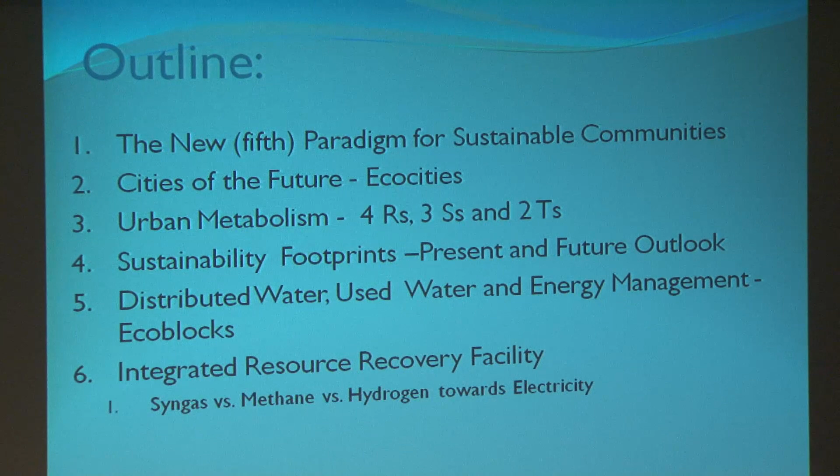So how do we do that? Syngas, methane, hydrogen, towards electricity, nutrients, biomass, fuel, soil, solids, incorporating solar and wind power, sequestering GHGs. And a lot of these things are already happening — not in the United States, unfortunately, although there are some promising developments now. But mostly it's abroad, mostly in China, Singapore, the Middle East, Europe, and so I will talk a little bit about this.

I wrote an article in Czech language, by the way, after 40 years. I call it, translated, Cities of the Future: Utopia or Unavoidable Reality. I obviously am for unavoidable reality, but some people may think it's a utopia.

But there are a few quotations which may help start the discussion. Urbanites now outnumber their rural cousins, and there's surprisingly good news. This is surprisingly good for the environment, because the average person living in New York produces just 30% of the greenhouse emissions of the average US citizen.

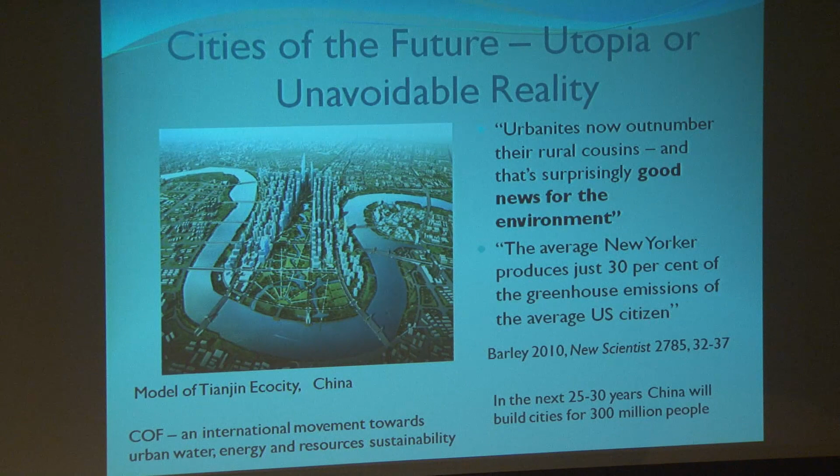What's counteracting this is that in the next 25 to 30 years, China will have to build cities for 300 million people. They will have to build one New York City every year. This is something China is facing, and they're trying very, very hard to face it in the right way, because they know if they don't, there might be a pretty bad catastrophe.

I already introduced the cities of the future, and here is a picture of Tianjin, which is now being built as a consortium of China and Singapore, near Beijing, about 150 kilometers southeast of Beijing.

So we talk about this trinity of sustainability: society, economy/economics, and environment. Sustainability means that all these three are in harmony. There is some kind of hydropolitical discourse in our area, but we're also saying it's not only that they're in harmony today, it has to be in harmony in the future.

Now people are also saying we cannot just make them equal. We have to see that environment and public health are a predominant issue in this sustainability discussion. Sustainability is achieved when outcomes which are socially, economically, and environmentally sustainable are successfully contended in the intergenerational context. So originally, sustainable development was defined as that which meets the needs of the present without compromising future generations.

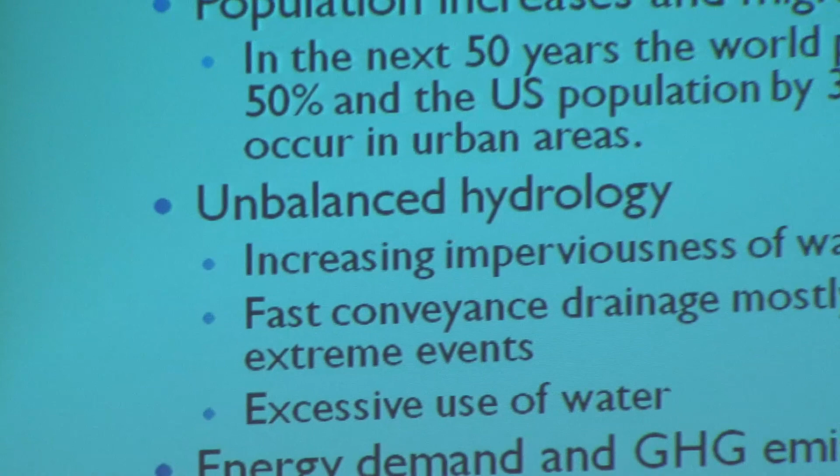We have unbalanced hydrology; the hydrology is not functioning well, because of increased imperviousness and fast conveyance systems, mostly underground, so people don't see water or wastewater. They just see the impact downstream. We have excessive use of water, and obviously high energy demand with excessive GHG, greenhouse gas emissions.

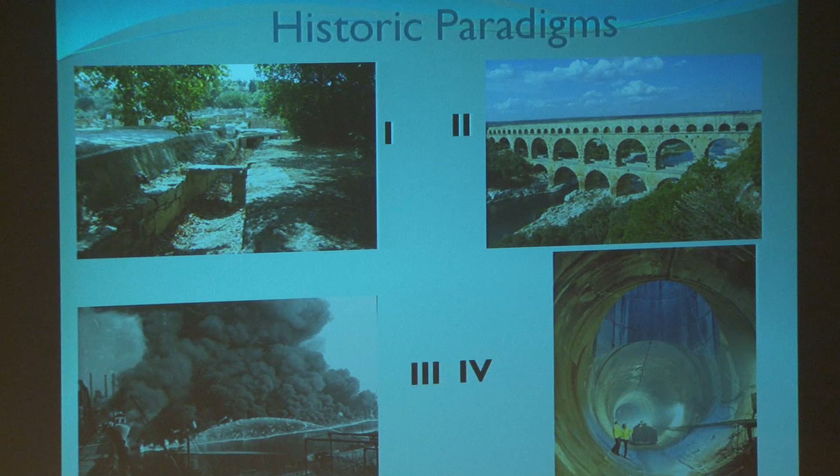So why a fifth paradigm? I put four pictures here for the previous four paradigms. The first picture is from Athens, dating about 2,500 years ago. At that time, water was basically provided by springs and wells, and surface drainage was by gravity. I was so excited when I saw this channel in this old marketplace in Athens, because this is how they did it 2,500 years ago. This is not much different from what you can see now in developing countries.

Paradigm number 2 is long-distance water transport. Some of these aqueducts, all Roman aqueducts, were up to 50 kilometers. But if you go to Istanbul, which used to be Constantinopolis, they had aqueducts coming from 400 kilometers. So they knew how to do that. They were distributing water by pipes, lead pipes and clay pipes. Sewers were invented, Cloaca Maxima in Rome, but that was preceded by buildings and cities on Crete.

Rainwater was harvested in Pompeii. They had rainwater harvesting, which is very common in the Middle East and the Mediterranean, along with some primitive treatment. So that's paradigm number 2.

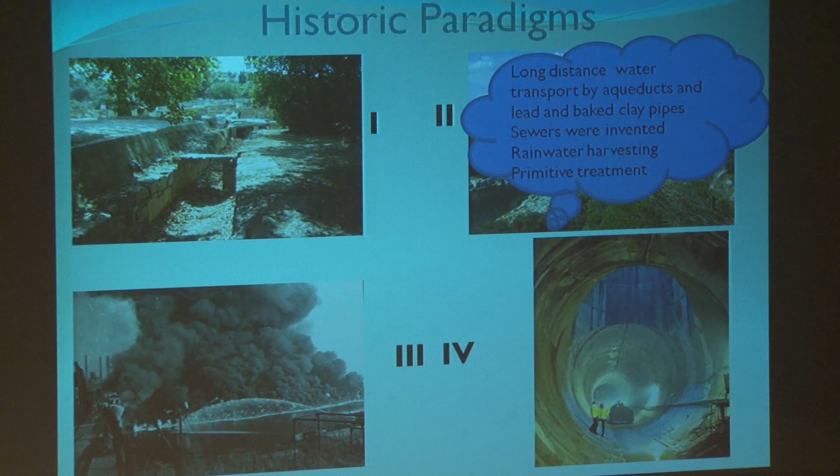Then came the industrial period, which dramatically increased pollution. Rivers caught on fire, as you saw in the picture—the famous Cuyahoga River fire in Cleveland. Actually, there were several fires because of too much oil and too much junk coming into the river. So people decided to cover the streams and put them underground, out of sight, no problem.

This is what actually happened in Boston to Stony Brook. Part of Stony Brook goes under the Northeastern campus. Stony Brook was a very historic river in Boston, but nobody knows it. People only know the Stony Brook train station and Stony Brook Park.

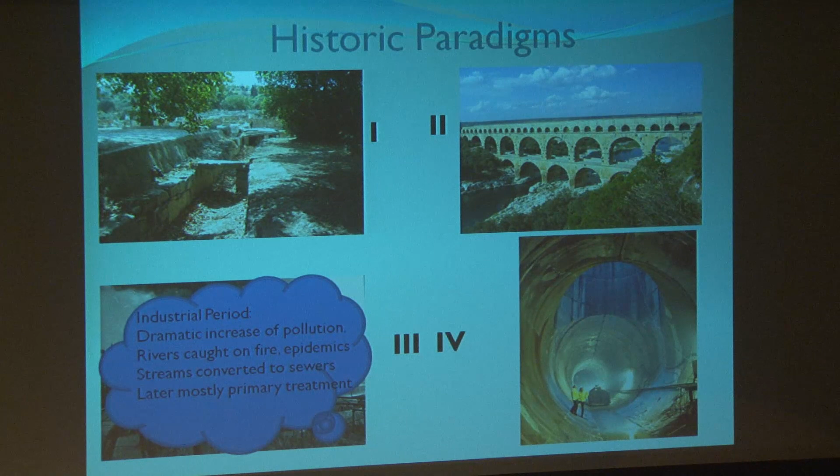But there was a river bigger than Muddy River, which is now underground. It should be daylighted. Now the 4th paradigm was after the Clean Water Act. We are now in this 4th paradigm. Developing countries will still be on the 3rd paradigm, with heavy investment in infrastructure, deep tunnel storage, and combined sewer overflows—basically characterized by using water collected by fast conveyance, end-of-pipe treatment, and dumping.

So we have to go now to changes, because we have problems with the 4th paradigm. The natural hydrologic status of urban water bodies and watersheds has been modified by imperviousness, building sewers, and stream modifications, including burying streams. This impacts the remaining streams, increasing high flows and flooding, with peak flows increased by a factor of 4 to 10. It becomes very difficult to sustain viable populations and biota, with increased variability of flow and increased stream bank erosion.

There are problems in groundwater too, including here in the Back Bay area, where buildings were sinking because groundwater levels dropped as recharge diminished. Here is Mexico City—this cathedral should be horizontal, but as you can see, it's kind of sinking. The same subsidence problem is happening in Venice, Philadelphia, Mexico City, Boston, and many other cities.

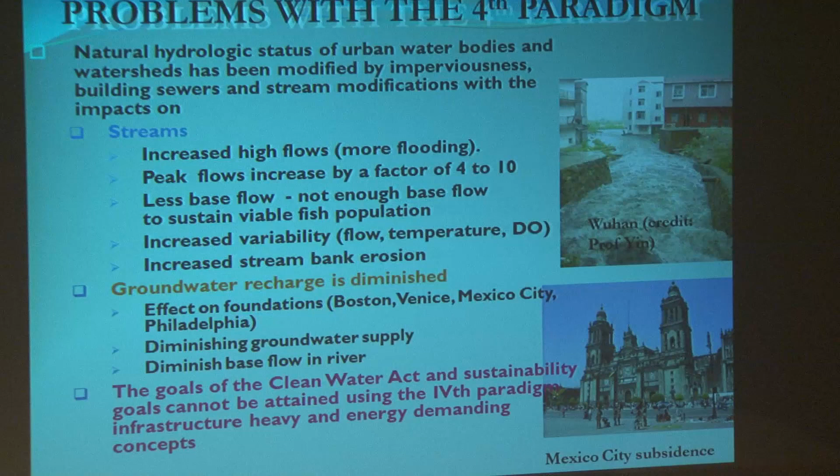We have diminishing groundwater supply. People don't even use groundwater anymore, causing diminishing base flow. So people are realizing that we cannot meet the goals of the Clean Water Act by 4th paradigm infrastructure, by 4th paradigm management of resources and water.

There's also damage to streams from wastewater disposal. When you take water upstream, there isn't enough flow left in the streams—for example in Denver, or the Chattahoochee River in Atlanta. After this water is used and reused in the city, it discharges a huge effluent into the stream, which becomes overwhelmed with effluents. We call these effluent-dominated streams.

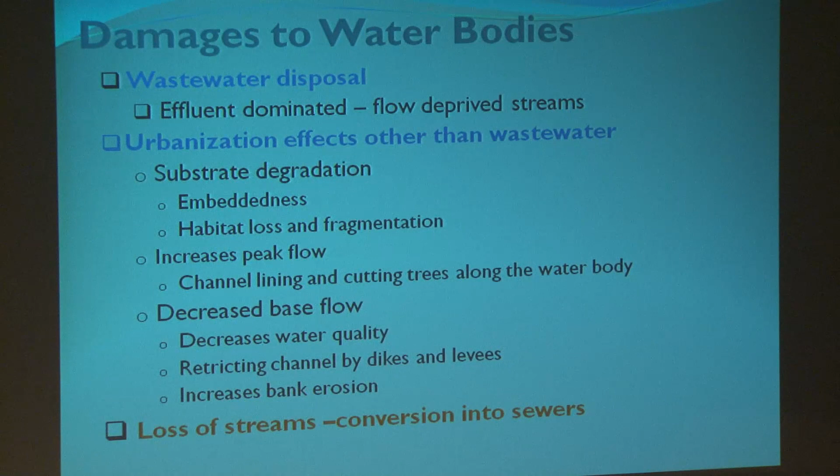Other problems include substrate degradation—the bottom of rivers covered by muck and clay instead of gravel and sand—habitat loss and fragmentation, increased peak flows from channel lining, cutting trees along water bodies, and decreased base flow. This is one of the worst problems of urban streams, and their final destiny is changing into sewers and culverts.

We have new threats to water supplies, problems maybe not as prevalent yet in the United States, but already coming. For example, 16% of lakes in Florida are so-called hypertrophic—beyond eutrophic. Hypertrophic conditions are characterized by too much nutrients and harmful algal blooms, with millions of organisms, sometimes more, in 1 milliliter. That's basically a pea soup, as you can see in these slides.

The lower slides are something I'm working on right now—it's a danger to the water supply of Prague in the Czech Republic. This is not the reservoir from which water is taken to Prague; this is a forebay. The actual reservoir is very large, with 4 small reservoirs already overwhelmed by cyanobacteria algal blooms.

We have problems with new chemicals appearing in the environment: endocrine disruptors, antibiotics, and pharmaceutical nanoparticles. People are talking about many things now coming to our recognition, and we have to do something about that. So this was kind of a bleak picture.

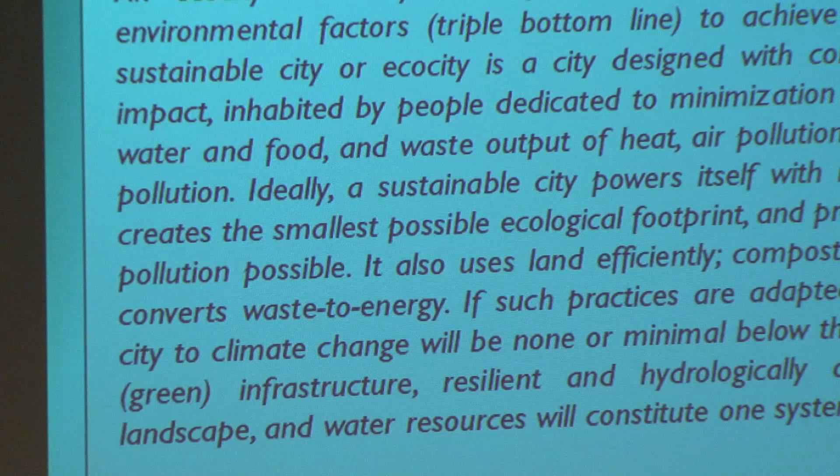In 1985, he wrote something about eco-cities. The book was republished recently. He defined an eco-city—a city that is sustainable, behaves well, everything balanced—as a city or part thereof that balances social, economic, and environmental factors according to this triple bottom line to achieve sustainable development.

A sustainable city or eco-city is designed with consideration of environmental impact, inhabited by people dedicated to minimizing required inputs of energy, water, and food, and minimizing waste outputs of heat, air pollution, carbon dioxide, methane, and water pollution.

Ideally, a sustainable city powers itself with renewable sources of energy, creates the smallest possible ecological footprint—we will be talking about footprints—and produces the lowest quantity of pollution possible. It also uses land efficiently, composts used materials, recycles or converts waste to energy. If such practices are adopted, the overall contribution of the city to climate change will be none, or minimum below the resiliency threshold.

Green infrastructure, a resilient and hydrologically and ecologically functioning landscape, and water resources will constitute one system. We've been thinking about doing something better, so we have to measure the outcome.

We have two very popular measures in the United States which are spreading worldwide. One is LEED, Leadership in Energy and Environmental Design, which measures the sustainability of the site: smart location, green design, energy efficiency, indoor environmental quality, innovation and design, and neighborhood patterns.

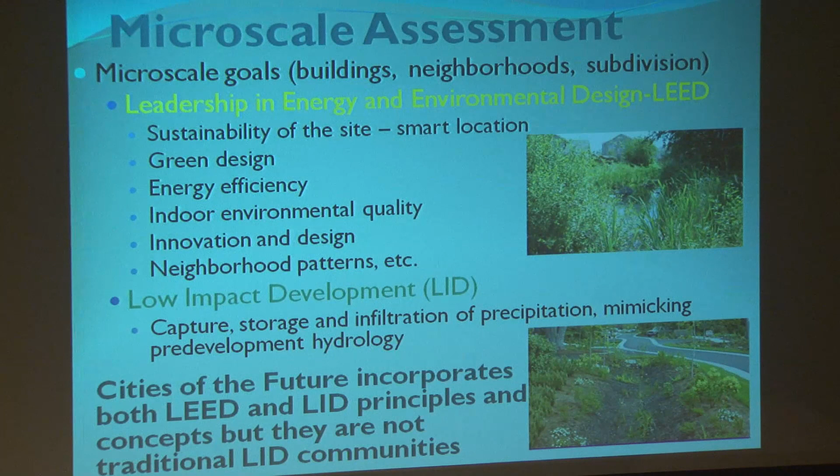So what are the cities of the future? Is it buildings and neighborhoods conforming to LEED criteria connected to sustainable surface drainage? We have a problem with this.

The problem is that LEED's water reclamation, conservation, and stormwater management criteria represent less than 15% of the total LEED index. So if we want water-centric, sustainable communities, this may not be the best way to do that. A water-centric, sustainable eco-city must comply with LEED criteria, but has to do other things to go beyond.

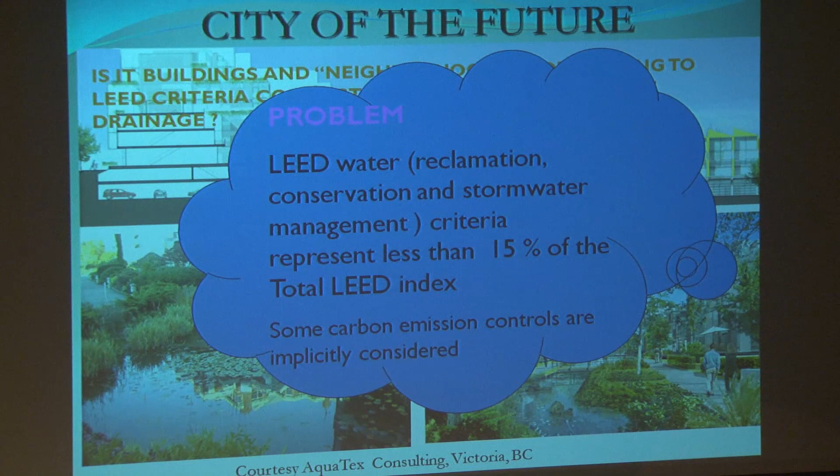Some carbon emissions reductions are implicitly assumed, but not specifically formulated. LEED does not consider carbon emissions directly, but it's implicitly understood that they may improve it. These are both basically micro-scale measures.

Now here is another, more macro-scale measure of the eco-city. This was formulated by the World Wildlife Fund and is known as One Planet Living. These are 10 criteria, and I've seen in the literature that they are increasingly coming to the forefront and becoming a worldwide yardstick for eco-cities. The first is zero net carbon emission.

It means there should be no impact on climate warming by eco-cities, so 100% of energy might come from renewable sources. Zero solid waste means 99%, or only 1%, goes to the landfill, which implies a lot of reusing. Sustainable transportation with zero carbon emission in the city itself.

Local and sustainable materials used throughout construction. Sustainable food outlets providing organic and fair trade products. A 50% reduction in water use from the national average.

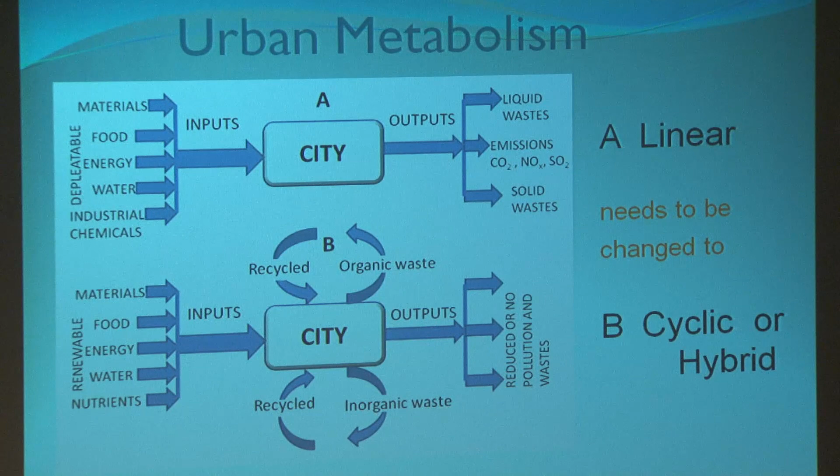Either it can be completely cyclic, complete recycle, or hybrid. Again, we'd like to use renewable materials, not excessive use of resources - materials, food, energy, water, nutrients, chemicals. Recycle and reuse them inside the city or on site, and then the output will be reduced or no pollution, and no waste, or very little waste.

I'm again thinking about 30 years from now, when you young ones will be presidents of the companies. So that's what you will be doing, I hope.

So we need some macro scale, large scale footprints. A footprint is a quantitative measure showing the appropriation of natural resources by human beings. There are three of those footprints. One is ecological - that's a measure of the use of bioproductive space, for example, hectares or acres of productive land needed to support life in the cities.

The second one is water, how much water is used - we can use liters per capita or gallons per capita per year or per day. And the third one is carbon. Carbon is a measure of the impact that human activities have, measured in units of carbon emitted to the atmosphere per capita, in kilograms or tons per year.

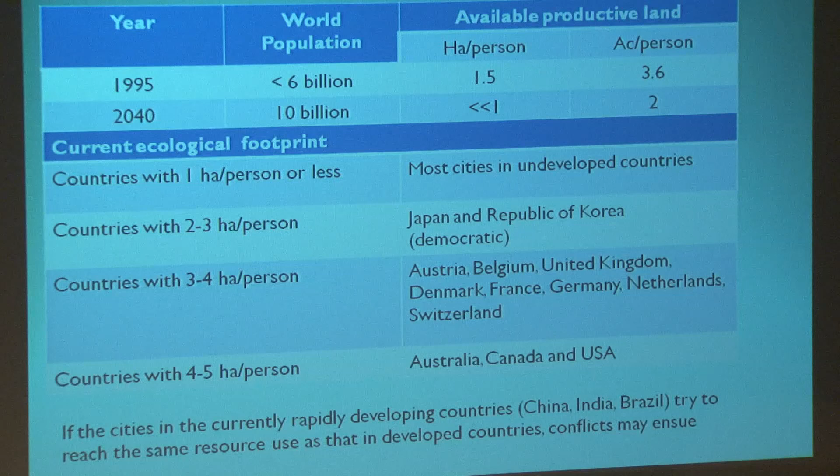Now, if you look at the countries which comply with this 1 hectare per person or less, we see most cities in undeveloped countries, because the people are really living a bad life. They have hardship, they don't have enough resources. Countries with 2 to 3 hectares would be Japan or the Republic of Korea. 3 to 4, most European countries. Countries with 4 to 5 are Australia, Canada, and United States. But what I'm saying is, in 2040 there will only be 1 hectare per person available, and we are using 6. So that means there will be a conflict.

And these cities in developing countries are rapidly developing, their living standard is increasing. They want to have the same goodies as we have in the United States, but they cannot - because if everybody wants to have this living standard under this linear system, it's not possible. The resources are just not available. They are not there. So there's a big imbalance.

Water use - the US is leading in water use, about 650 liters per capita, roughly 160 gallons, that's what you hear when you use US units. The US and Middle East countries - Abu Dhabi, El Paso Texas which is in a dry region, Dubai - they all have very high water use. If you look at some other cities, typically Europe would have 150 liters. I was just looking at Prague - Prague is about 110 liters per capita per day.

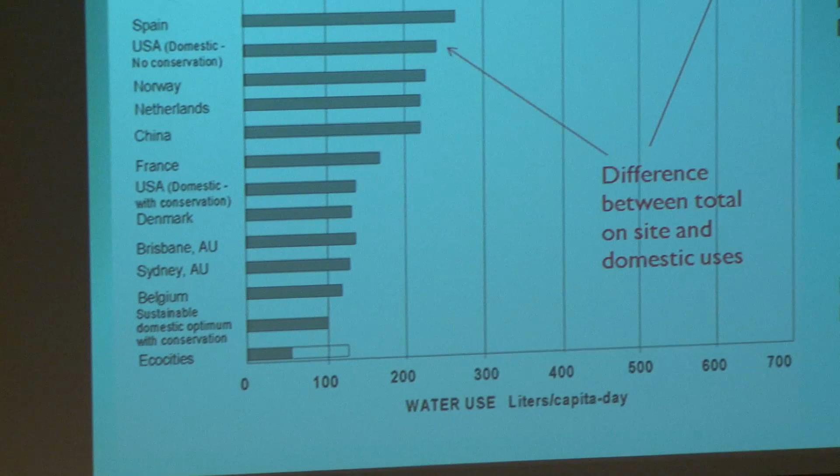These eco-cities are built in China, in the Middle East. They are built in very hostile environments, in brownfields, desert environments that don't have enough water. Tianjin has very little water. So they do have to do that hybrid cyclic water management.

On top of the direct use is something called virtual use. Virtual use is for producing meat, growing corn, producing electricity, making cars - this water has to be used, and should actually be added to the water use per capita. Again, this just makes this water situation even more difficult for the future.

For example, I put for food, typically farmers and producers and factories which make food or industries which produce the food, then stockyards - they use about 2,000 liters per capita per day on top of the 600 liters. So we have a big problem and we have to somehow deal with it.

Here are the results from the American Water Works Association study in the 1990s of water use in households by U.S. households. I'm not going to go through every component, but you can see the total indoor on average in the 1990s was 240 liters, maybe 60-70 gallons per capita, but the total was about 550 or 600 liters, or 150 gallons.

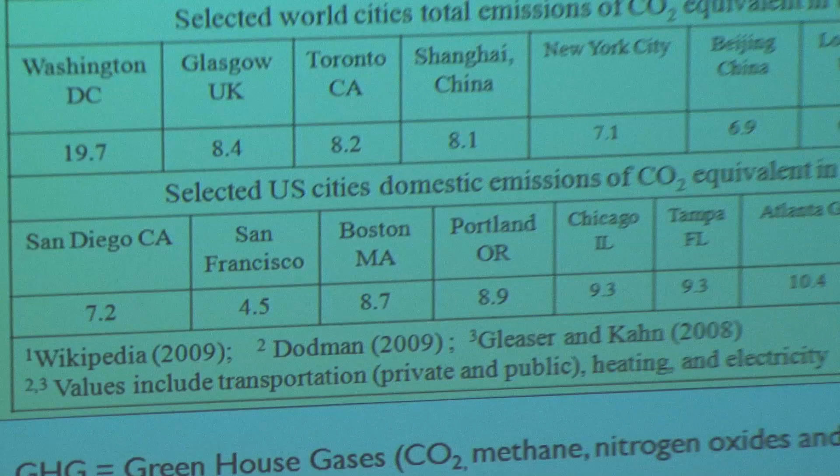And here is what they actually were saying in the beginning, the third slide: average US emissions are 19 tons per capita per year. But if you look at the US cities, with the exception of Washington D.C., which is a kind of outlier, it is indeed a smaller portion - much less than the average person. So there is something in the cities that makes these GHG emissions smaller, and that's obviously car use, traffic, use of automobiles.

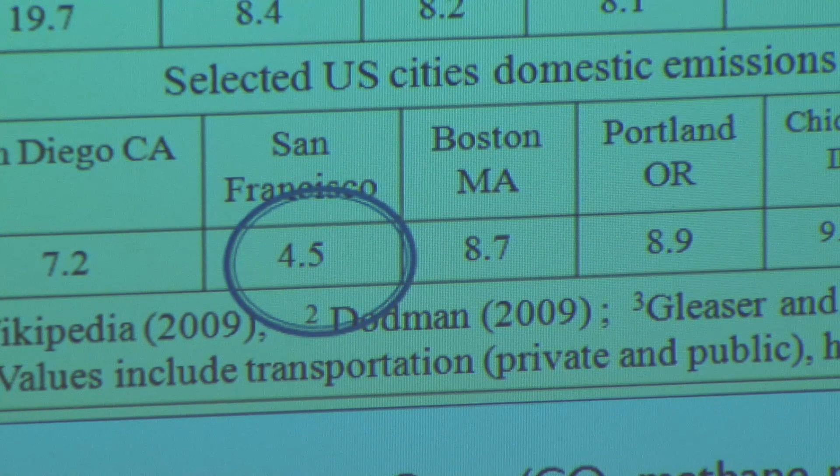Here I would like to show one - San Francisco. San Francisco is on the same level. You're reaching with this 4.5 tons per capita, you already reached that sustainable limit. It's close to what you would expect from a well-behaving city, the same level as, for example, Tokyo.

Now, what is so special about San Francisco? Well, you don't drive cars in San Francisco - it's very difficult. You have excellent public transportation, all of it by BART, which is electric, or electric buses. So it's all electric. They probably have some nuclear power plants now, subject to tsunami or whatever, but San Francisco is a very high density city. You will see that these are the parameters which make these GHG emissions smaller. So San Francisco is on a European level, and if they do this 2-3 tons, that's already the limit you would like to have. And if you can make it by renewable resources, then you're home free. Then you're home, and it can be done.

So current urban systems are linear. Excessive water volumes are withdrawn, mostly from distant sources, from Quabbin for example. Inside the community, water is used only once and wastefully. Treated drinking water is used, for example, for landscape irrigation for growing grass. There are great losses by leaks and evapotranspiration, and water is transferred underground to distant large wastewater treatment plants, which use excessive amounts of energy and emit carbon, often methane, which are greenhouse gases. Then the effluent water bodies are effluent dominated, and so many of them disappear from the surface.

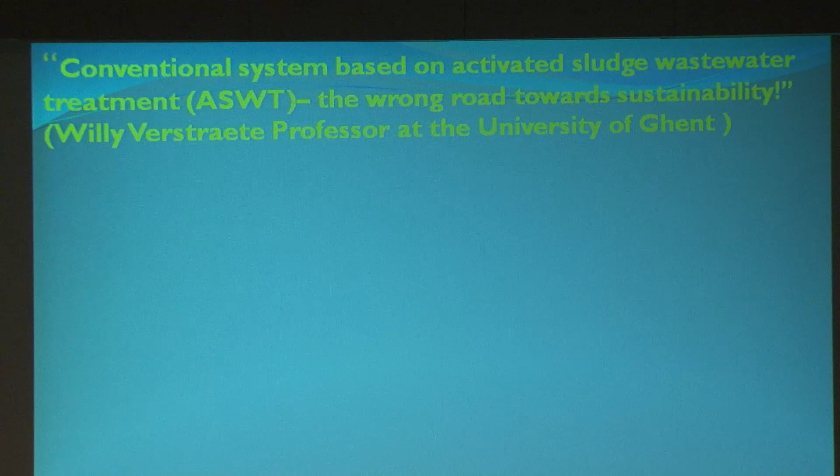Now here is a quote by a very famous figure in the field of ecocity and wastewater technology, Professor Willy Verstraete - he's a leader in this new sustainable waste treatment, we will not call it wastewater anymore, but let's say for the time being, wastewater treatment technology. He said that the conventional system based on activated sludge wastewater treatment is the wrong way towards sustainability. And we will show why.

In this linear system, drinking water is primarily used as a transport vector and for irrigation. Only a minor part is used for nutritional purposes.

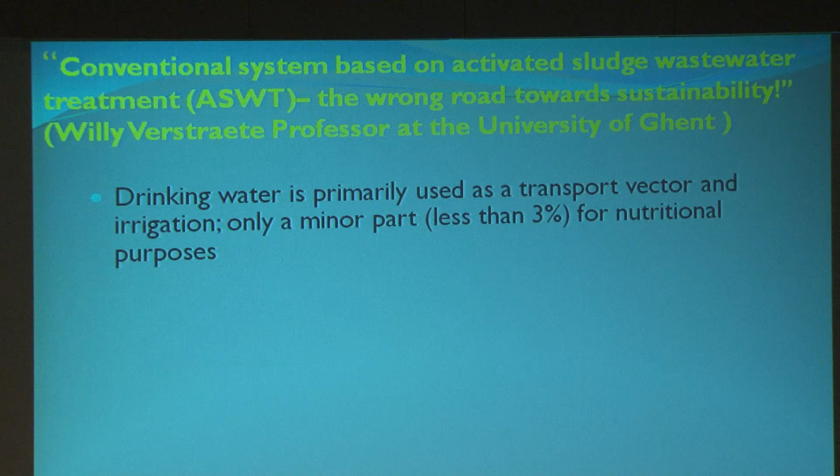Total carbon footprint of an activated sludge wastewater treatment is not sustainable, representing in Belgium or France about 125 kilograms of carbon per capita per year, compared to about 340 kilograms in the United States. The difference is due to nuclear power plants and hydropower in Europe. For example, 80% of electricity in France is produced by nuclear power plants, while here it's only about 30%, roughly.

Conventional removal of nutrients and potential reuse or recycle would require additional energy and would emit more GHGs. Heat and nutrients are generally not recovered. Energy recovered from sludge digestion is rarely practiced and represents only a minor portion of the energy potential. Residual pollution load is still significant.

So we have to close the cycle. Here we have some definitions, so I call it...

4 R's, 3 S's, and 2 T's. The 4 R's are: reduce water and energy by conservation; reclaim, which is to treat for safe discharge into the environment based on TMDLs, reclaim energy, and reclaim nutrients; reuse after additional treatment; and the 4th R is restore water bodies, because we need them as a resource and as part of the system.

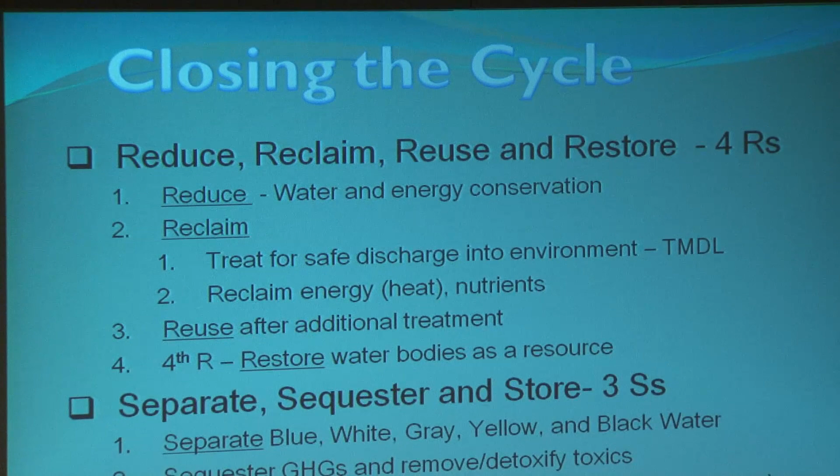The 3 S's are separate, sequester, and store. Separate the wastewater, or used water, into blue, white, gray, yellow, and black water. Sequester GHGs and remove and detoxify toxics, and store reclaimed water on the surface and underground.

The 2 T's are toilet to tap. In some western parts of the United States, they think they can reuse the sewage by treating it to that point. It's possible, all of this is possible. We can treat sewage today to a level commensurate with distilled water or drinking water. It can be done, it has been done. But I'm asking, is it needed? I would say maybe not.

So this new concept, finally getting to something, is eco-mimicry of the landscape: developing an urban landscape that would mimic, but not necessarily reproduce, the pre-development natural system. This means minimizing imperviousness, with drainage service mostly on the surface.

Reduction of energy consumption through public transportation, non-polluting fuels, electric buses and light rail. Green buildings, passive energy savings, water-saving appliances, etc. You probably know this because it's now a very popular topic of discussion.

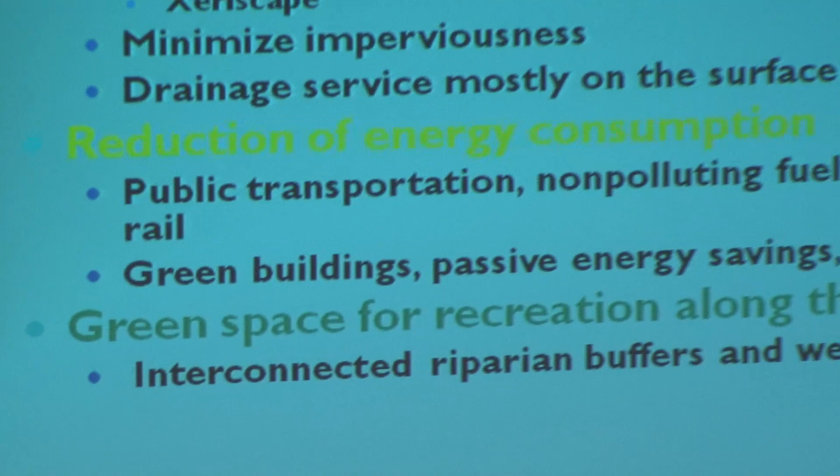Green space for recreation, interconnecting riparian buffers and wetlands around the rivers. Urban brownfields remediation and development—I already mentioned that many of these new developments are on brownfields, on land which has no other use. One of the rules of the eco-city is not to use agricultural land. Also, ecologically sound stream restoration and daylighting, including base flow improvement.

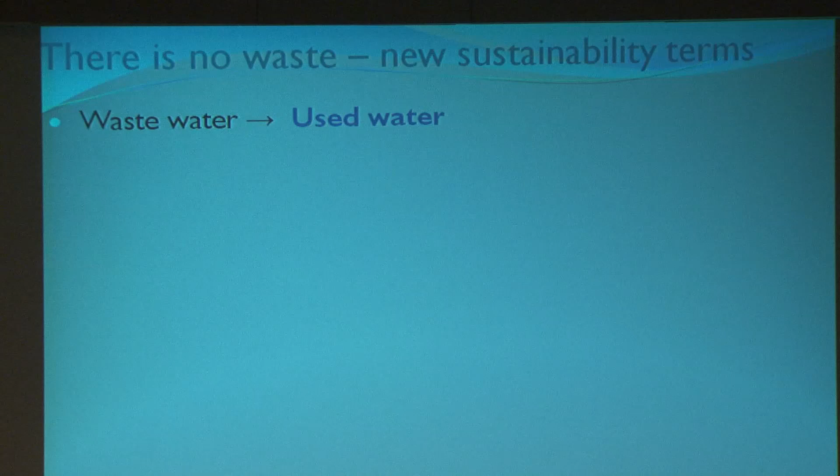So we have to invent new terminology. For example, wastewater is now called used water. Treated wastewater that meets standards for discharge into receiving waters and other non-potable uses is called reclaimed water. Reclaimed water treated to potable water quality is called NEWater.

That's Singapore terminology. A treatment plant without recovery of biogas, energy, or nutrients, versus a treatment plant with recovery of biogas, energy, and nutrients, is called an integrated resource recovery facility. I'm not making these up—well, partially, but it's coming from elsewhere. This is already all over the literature.

Blue water, new terminology, is clean natural water. White water is surface runoff. Black water is water containing urine, feces, and kitchen solids. Gray water is domestic used water without black water. And yellow water is obviously urine, which contains most of the nutrients in just 1% of volume. So we can separate these.

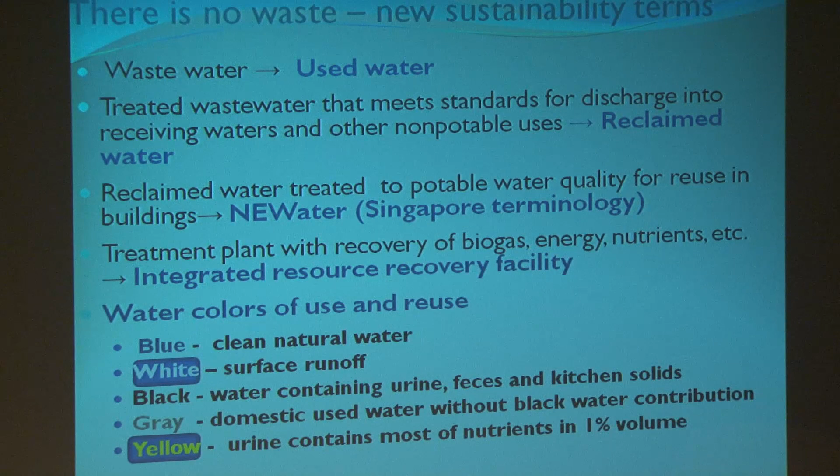Most surface drainage should adopt this LID concept, using ponds, wetlands, rain gardens, and stream corridors. We have to restore the first order urban streams, because they don't currently exist, and we have to improve the second order streams. So we can say these are urban best management practices, which we were discussing in terms of developing diffuse pollution control, non-point source pollution control—Professor Herberger mentioned it.

Our philosophy at that time was that people pollute the land and water, and we develop these best management practices to treat it. We just fix it. That's the philosophy of engineers. You can do whatever you want, but we'll fix it, okay?

Now today's philosophy is don't pollute. So we have to have a system which is not polluting. We have to incorporate into the landscape things which would also help the landscape function ecologically and hydrologically. So we have green roofs.

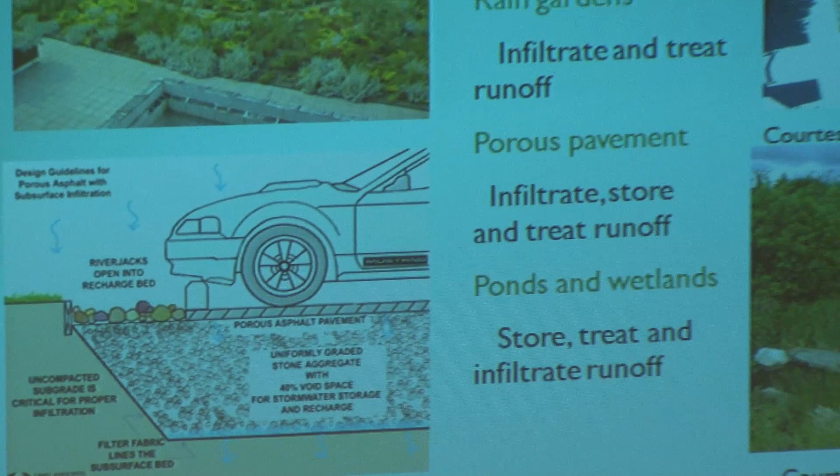We have this Seattle street, which is kind of a LID development. We have these pervious pavements. We use ponds and wetlands, and there's a plethora of these best management practices we can use. There is not a single one which would do everything, so you have to develop a system that would work.

Now urban water bodies must be restored, because they will be a necessary component of this new system if they are not. Left side is Lincoln Creek, which I was working on in the 1980s in Milwaukee. That's one of the first times where an urban stream was restored from kind of dead, concrete dead, to something which is functioning. They're still learning how to make it function very well, but it's functioning pretty good.

In China, in Beijing, they daylighted the river, and again they have this beautiful resource now which they can be reused for a number of uses.

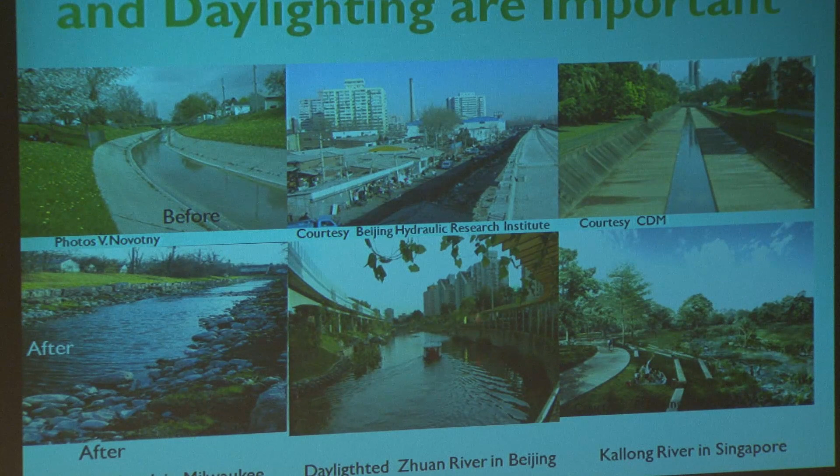And in Singapore, this is the Kallong River. Some of you are actually going to Singapore, so I will show how Singapore works a little bit later. They need this river to provide water - they actually provide new water, because they don't have enough drinking water. So this restoration of this river corridor, which is on the lower part, is an integral part of this system in Singapore.

So these new rivers, rediscovered streams, are an integral part of that. What has to be done to make the cities function?

Here is this interesting case in Korea. I use it as an example of what can be done, but I would not recommend doing it this way. So in the 1950s in Seoul, there was a river, the Cheonggye River. Cheonggye means river - actually the name means something like clean river, but it never was a clean river. In the 1950s, there were squatter developments because of a lot of refugees from the north during the war, so it was a terrible river.

So people did not like that. Government didn't like it. So they covered it with a double-decker freeway, on the right side.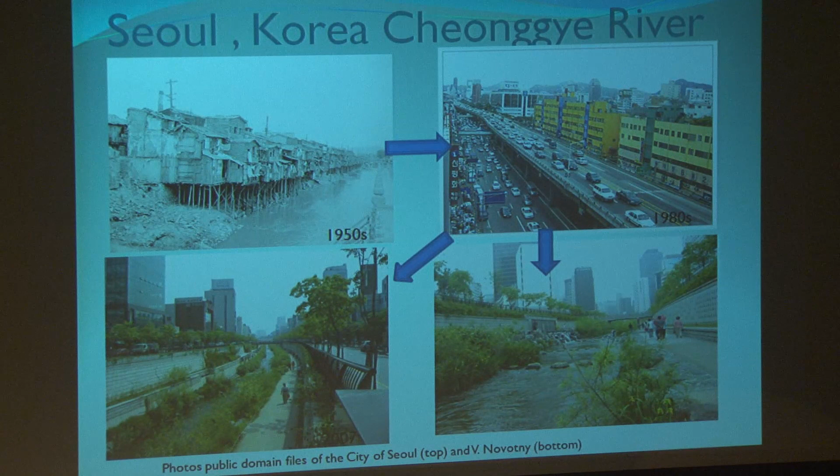Now in 2002, the new mayor of Seoul was a civil engineer - that just shows that we can be in politics. He's still president. He had this vision to revitalize the center of Seoul, because this area is near the King's Palace, and his vision was that the way to do it was to bring the Cheonggye River back to life.

It's a heavy infrastructure project. The problem with it, why I don't call it a good project, is because instead of restoring the flows and base flow and treating the water, they pump water from downstream, from the large river. So it is energy demanding.

But the reason I'm showing it is because it cost $115 million to $150 million US dollars. That's a lot. Lincoln Creek was about $80 million for about 15 miles. This is $115 million for 7 miles of stream.

But the economic benefits to these areas were enormous, both in Milwaukee and especially in Seoul. They claim that the economic benefits of revitalization, making this an attractive neighborhood rather than just a part of the city, were in the billions of dollars. There were several articles in civil engineering journals about this river.

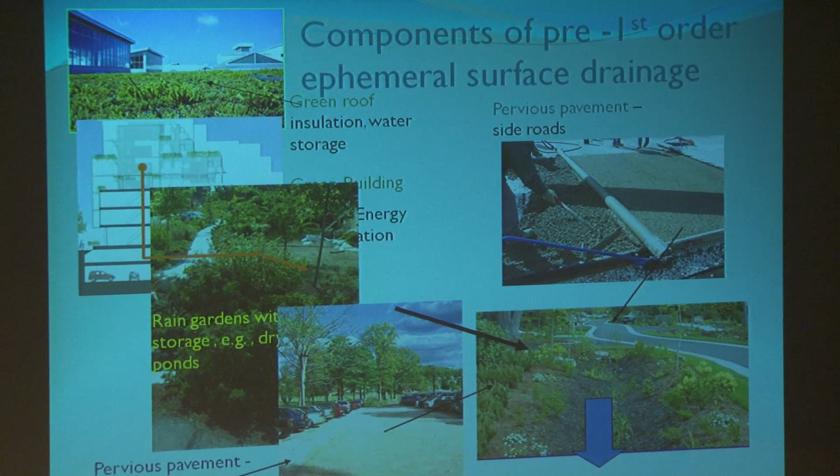We have to implement some rain gardens that will take this surface runoff and convey it on the surface. We may have to use pervious pavements. And again, there is a beautifully looking ditch, or let's call it what they still call it, rain gardens. Or we can use this system which is now in Seattle, the Seattle LEED development.

And if you ask how much flow and how much pollution you get, people say maybe only 10% of what it would be if we have a storm sewer or even a combined sewer.

So reducing flow load would reduce pollution. But these new urban streams you'll be creating need base flow, because by virtue of imperviousness there isn't enough recharge, so they don't have a base flow. So one solution is to build a treatment plant inside the community.

And it can be done. This is the Dockside Green development in Victoria, one of the eco-cities, where they put a treatment plant, and they did the same thing in Singapore and other places—put a treatment plant inside the community so the water could be reused in these restored and created surface water bodies. We have a similar situation in Foxborough, at Patriot Stadium, which uses this recycling system.

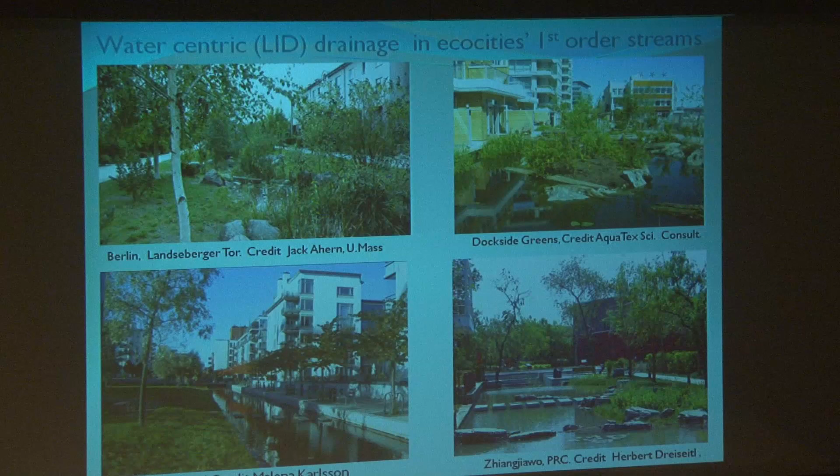Here we have some of these new restored surface drainage examples. The upper left is in Berlin, Landsberger Tor. The right one is Dockside Green in Victoria, which I mentioned and write extensively about. Lower left is Hammarby Sjöstad in Stockholm, and Zhiangjiawo in China, near Tianjin province—you have to see it to believe it. These are examples showing it can be pretty and it can function.

It doesn't have to be this way everywhere—in some places there was a creek that was restored, in other places they created the creek. But what does it mean? It means you don't need storm sewers, you don't have combined sewer overflows, and you can reuse the water on site if you wish to do that.

Patrick Lucey, who provided that picture, wanted to show you these are solar panels in this eco-city, which conforms to the requirements of an eco-city. We have to use this water inside the city to recreate these streams and reuse it in order to close the cycle.

So we cannot have a centralized system—we have to decentralize the water management system. A centralized system is basically once-through. It might be appropriate only if water conservation is considered with no reuse—just implementing water conservation and reusing water coming into the city. Heat and energy recovery may not be feasible, and water use for toilet flushing and irrigation may not be economical or efficient because you'd need dual pumping, piping, and long transfer of this reused, reclaimed water back to the city.

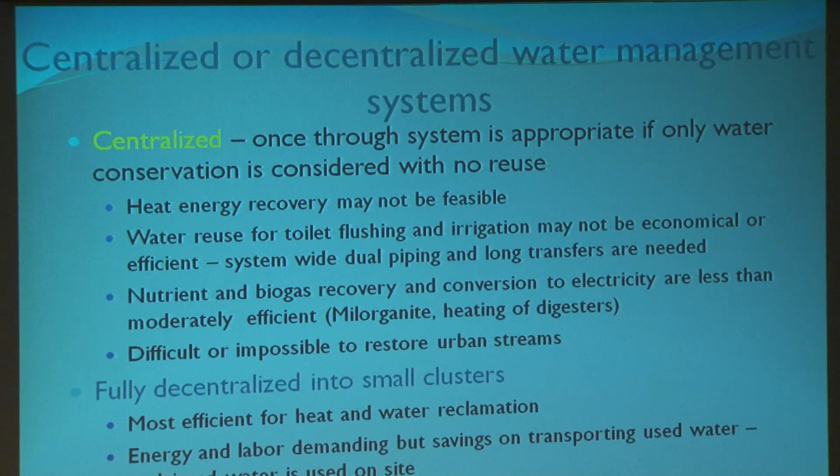Fully decentralized into small clusters is most efficient for heat and water reclamation—energy and labor demanding, but with savings on transportation, since used water and reclaimed water are used on site. Biogas production, use, and conversion to energy may be efficient in developing countries, but it's kind of touchy here. So we may need a hybrid system that retains the advantages of both.

So we still need a decentralized system—we have to divide the system into clusters. We may call them eco-blocks if they behave nicely. So a cluster or eco-block is a semi-autonomous part of the city that, for the most part, has its own water, stormwater, and used water management.

It may be the size of a large building, a high-rise, or a subdivision or section of the city with thousands of inhabitants. A cluster infrastructure distributes water and practices water conservation and reuse, implements energy savings in buildings, provides stormwater conveyance, water reclamation units—because you want to recycle and reuse on site—and energy recovery from wastewater. So you should have centralized or distributed biogas, energy, and nutrient recovery. The reason I'm saying this is you don't want to have methane or hydrogen in the building. That will not work. One match will do it.

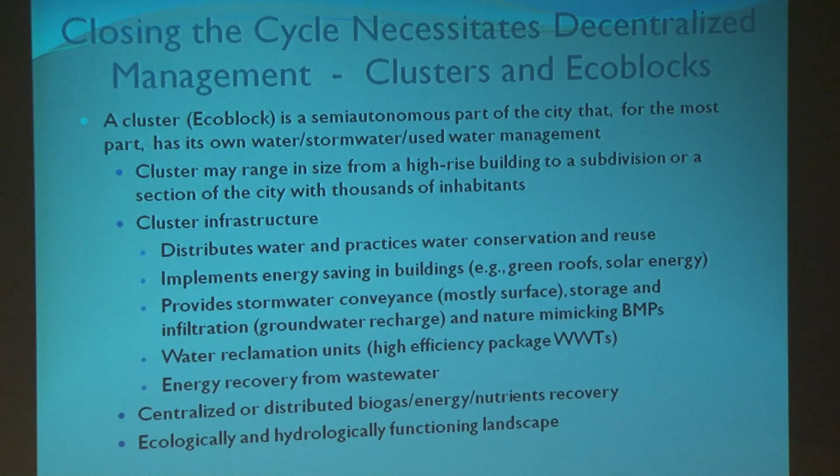You should have an ecologically, hydrologically functioning landscape, and they should be interconnected for resiliency. Because if one cluster's energy recovery or water recovery unit is not working, then you may have to send it to the next cluster where it is working.

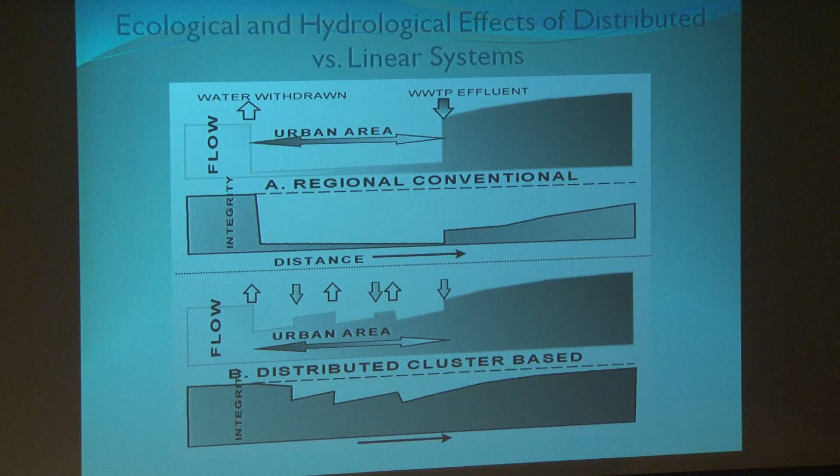This would have an effect on the streams because, as you see on this slide, if the water is withdrawn—there are two slides. One is water, which is a linear system, flow and integrity. If you have a linear system, your water is withdrawn and there's very little water left in the city. I'm not necessarily talking about Boston, because the Charles River is kind of an exception. Integrity is decreasing because of these low flows and pollution coming from combined sewer overflows or sewer overflows. If you have a distributed system, the CSOs do not happen, and the water flows will be reduced gradually, but in stepwise fashion, because you take the water and reclaim it for reuse for flow, for example, and so on. So this integrity will not be distorted, disturbed, or destroyed as it would be in the linear system.

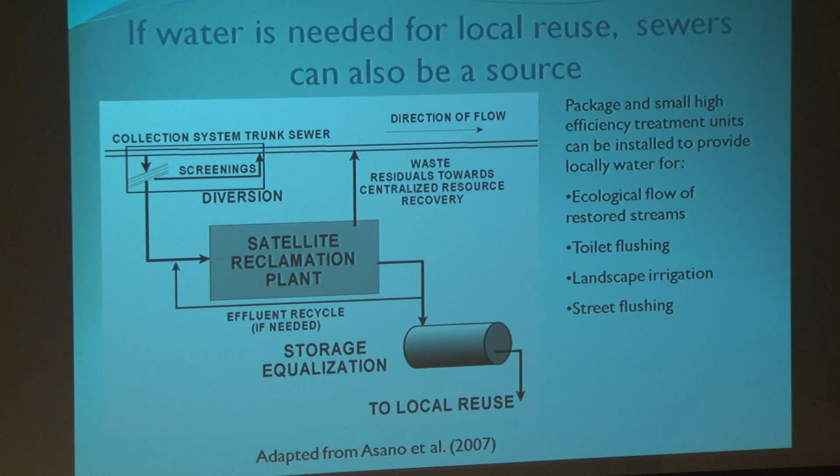If you need the water, you can take it from the sewer to start with. Professor Asano has proposed that you can build these satellite treatment plants around the city. What will happen, however, if you reclaim the water and reuse it, is that this reused water will not go back into the sewer, because it will go into new streams for reuse. What will go into the sewer, however, is the sludge and solids which you produce on site, in this satellite treatment plant. So that leads to an idea.

Why? Because the flow in sanitary sewers will be more concentrated than it is now, when you have a lot of rainwater coming into the sewers—since the rainwater will not be going there. So we have much more concentrated flows carrying a lot of solid sludge and things like that. And that's good. That's good.

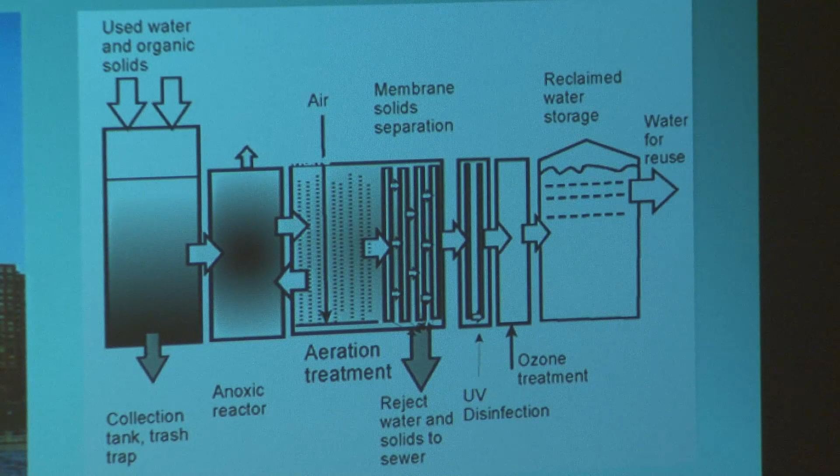Now here's an example of the satellite type of cluster: the Battery Park Solaire development in New York. They take the used water, treat it with a more or less conventional system, but then reuse it for toilet flushing and sometimes for irrigation. So this gives an indication of the size of a cluster—there can be thousands and thousands of people living in that complex. So again, a cluster can be the size of a large building, or it can be part of the city.

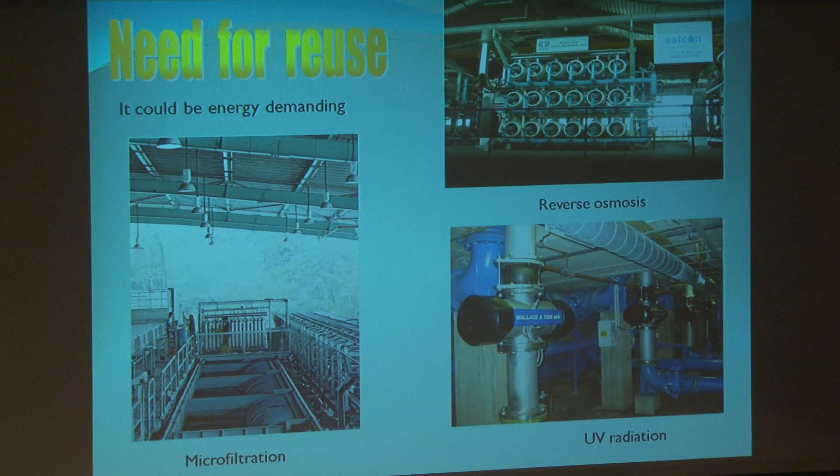If you need to reuse the water, you have to use new technologies based on microfiltration and reverse osmosis. You cannot chlorinate, so you have to use ultraviolet rays, and that's energy demanding. So we may have to talk about something called the water-energy nexus. It means that once you start reducing these flows and reusing them, at some point you stop reducing and instead start increasing energy demand, because these reverse osmosis units use a lot of energy. For example, if it's low salinity water, they use about 4 or 5 kilowatt hours per cubic meter. But if you desalinate from the ocean, they use up to 25. If you go to Masdar, where the Persian Gulf is heavily salty, you use far more than 25 kilowatt hours per cubic meter of water.

So we're talking about this energy nexus: in phase one, water conservation proportionally reduces energy use and emissions. But once you start phase two—reusing stormwater and other kinds of rainwater—you have to do some treatment, so this decrease in energy use may level off. And once you move into reverse osmosis and other energy-demanding processes, you may actually be increasing energy use. So you should always be looking for this optimum point. In the US, 1 kilowatt hour represents 0.6 kilograms of carbon dioxide. In France, it's about 0.22.

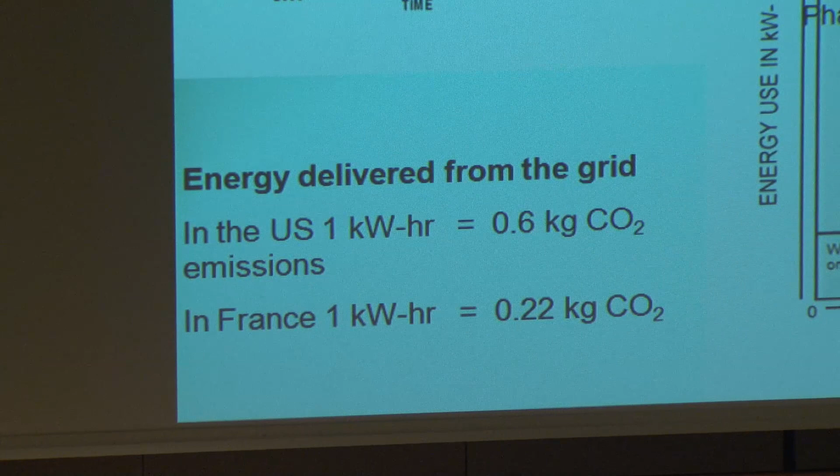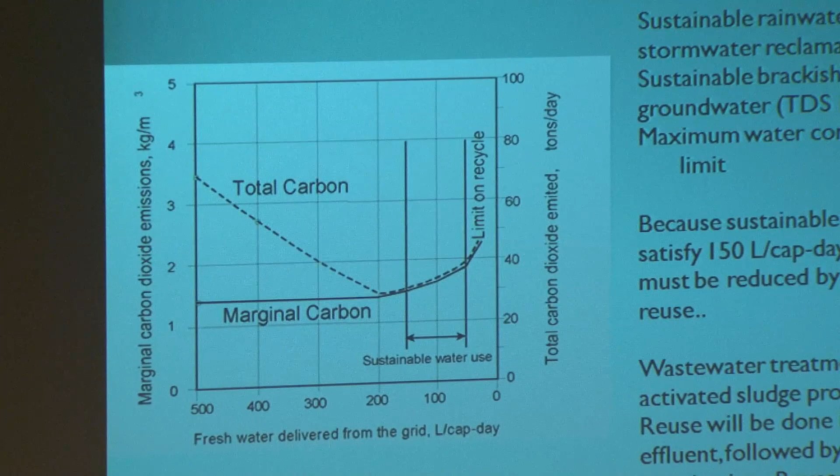Here I made an example. Again, marginal carbon is the carbon per cubic meter. Total carbon is total carbon from the community. Population 100,000, originally using 500 liters per capita, but they don't have this 500 liters per capita available. So they have to get to a region where they have only 150 liters per capita available. This is actually El Paso, Texas.

I changed the numbers a little bit, but just for illustration. They have this 500 liters demand, but the Rio Grande does not provide much water. They had some groundwater, but they mined it to the point it's salty. So they have to go to reverse osmosis, and they only have about 150 liters available from that. So they have to go to dramatic reduction.

They already noted that if they stop irrigating, some of this green subdivision, they reduce total energy use, and obviously emissions. But once they started with reverse osmosis, that energy use went up. It's much worse in the Middle East, but again, the Middle East has a lot of solar energy. Interesting, total...

Cycle is in Singapore. Again, a lot of CDM people here know this case. Singapore is a very small country, 700 square kilometers, population 5 million. It's basically a city-state on an island, and they have 4 sources of water.

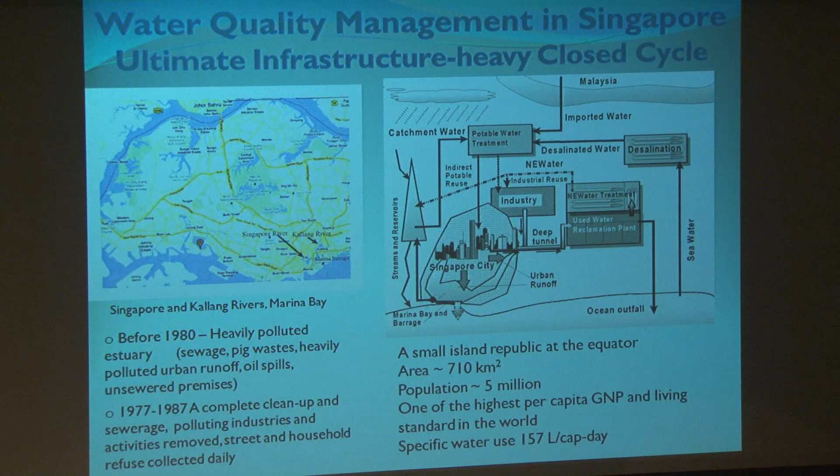One is what they call imported water from Malaysia, but they're afraid they'll lose it because the Malaysians don't like them. Then they have fresh water from catchments, shown here, but there's not enough of that.

Then they have water from the ocean, desalinating water, and after treatment they reuse it as drinking water. But that's still not enough, so now they have to close the cycle.

What they do is build a tunnel, treat the water, use it, then treat it by very high-level processes. Part of it goes out to the ocean, a portion is treated by reverse osmosis, microfiltration, and ultraviolet disinfection. Originally they were using it only for industry, but now they're thinking about putting it back into this freshwater reservoir, which may increase their water supply by 10-15%. So they did close the cycle, as you can see.

But to do that, they had to do a complete cleanup of the watershed. All the sewage must be collected and go to this water reclamation plant. They do other things too - street and household refuse is collected daily. So they're already doing it the right way, but it's a heavy infrastructure.

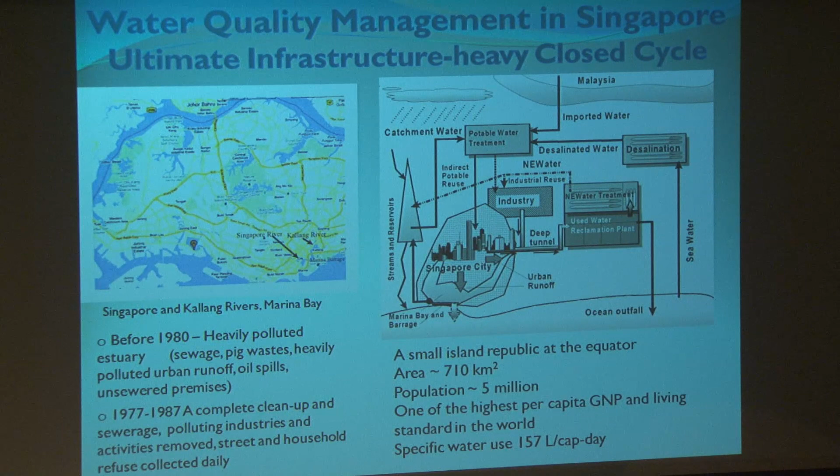Here's how they did it - again, a CDM project - they converted the freshwater seawater estuary. This is the Singapore River, this is the Kallang River portion of the estuary. They built a marina barrage, which changed this estuary into a freshwater body.

They had to do all the BMPs in the watershed to clean up the surface runoff. So this is now much cleaner than it used to be. And they pump the water - this is a pumping station here, I believe - to these freshwater reservoirs to supplement what they have. So this is a completely closed cycle.

I'm not giving them a clean bill as an EcoCity yet, but they are very close. The reason I'm saying they're not there yet is because they still have relatively high energy use, but with the vengeance and enthusiasm they have, they will very quickly be at the EcoCity level.

So in order to reclaim, to do it better, we have to switch from aerobic to anaerobic systems - well, it's not strictly necessary. So we will have the 3 S's: separate, store, and sequester. We will have 3 R's: reclaim, reuse, and recycle. We will have no 2 T's.

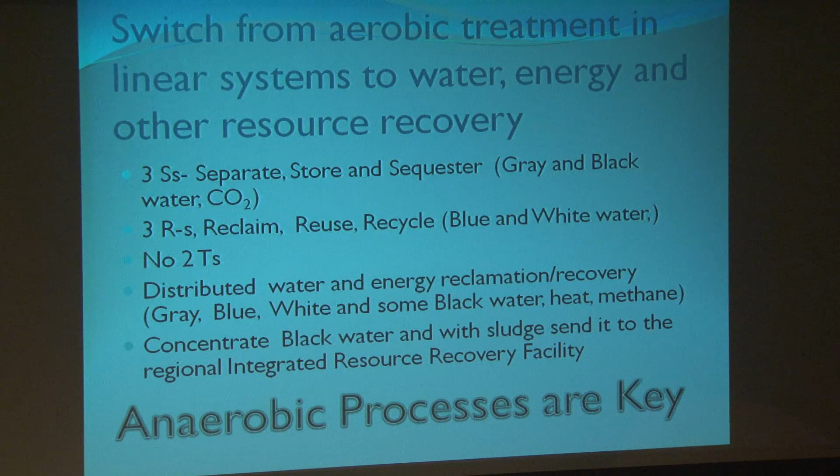So there's a number of interesting projects. Here is what I would call double recycle of the used water produced by this eco block. This is not just one building.

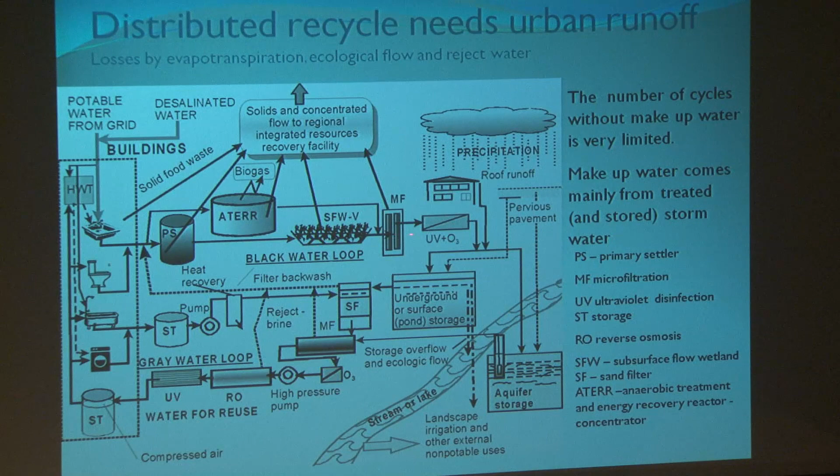So we have a black water loop and a gray water loop. In the black water loop, we want to get all the solids and bad stuff out of it. If we can, recover biogas, but basically send the solids and bad stuff to the integrated recovery facility, while keeping some water because we will need this water in the gray water loop.

Now the gray water loop takes water from the baths, from the laundry, and maybe from the dishwasher, though that's not shown, and stores it. It has to be pumped. We can recover the heat if you want to—actually, you should recover the heat. There must be some filtration, like sand filtration, because that gray water is not exactly clean water. This is actually nasty water with a lot of pathogens even.

Microfiltration, reverse osmosis—if you want to do the complete recycle and reuse it, for example for showers and laundry and things like that. You can supplement with water from the grid, and if you put the numbers on that—this is actually real, although I did some correction.

This is what's called the Qingdao double loop, the Qingdao eco block, which was developed by University of California, Berkeley, Professor Harrison Fraker—some of you may know the name. He proposed it for Qingdao and did some things which I would note.

For this, in order to keep it going, you need precipitation, and you have to store water during times of abundance, then reuse it during times of shortage. Again, this water can also be used for irrigation.

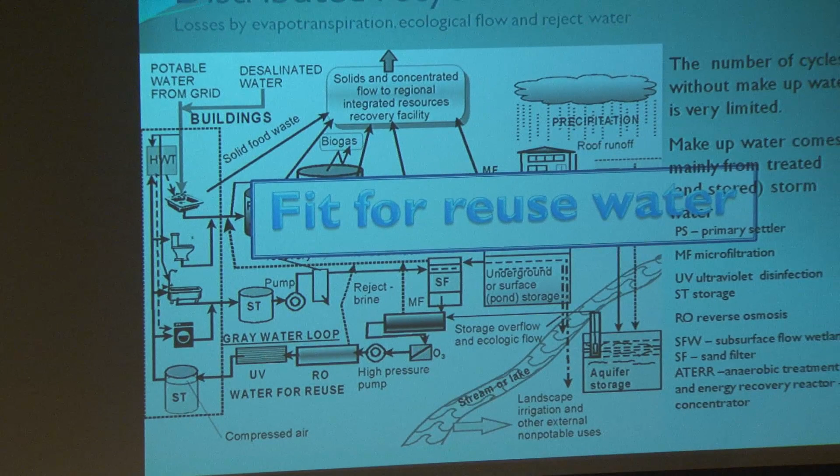So in general, you can do fit-for-reuse water—you don't have to do double loop. If you want to irrigate, it would be stupid to take the nutrients out of this reclaimed water, because for irrigation you keep the nutrients in. If you want to use it in-house, you have to take them out. And if you want to use it for base flow or ecological flow, you have to take some nutrients out.

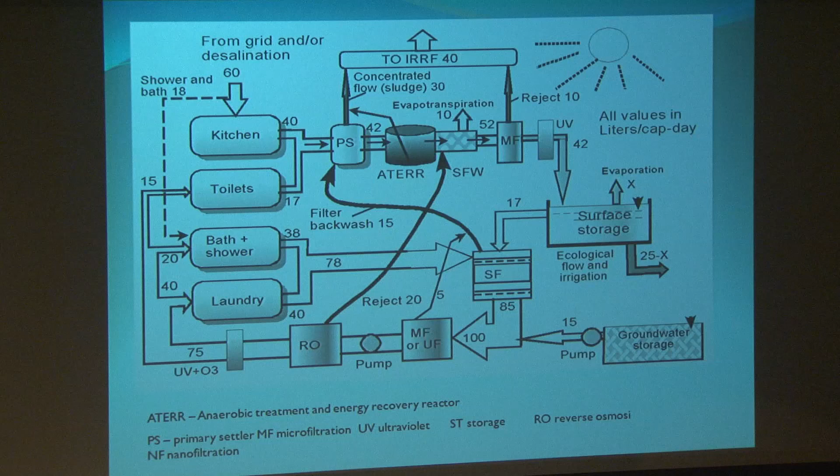Here is a water balance on a dry day, which shows that in order to only use 60 liters from the grid, you have to use all of the other things we were collecting before—a little bit of excess of the liquid black water goes to surface storage, which you can use for ecological flow, or put back into this double loop for gray water.

Would you do it in Boston? Probably not. But would you do it in Masdar, or the Southwest United States? I would say yes.

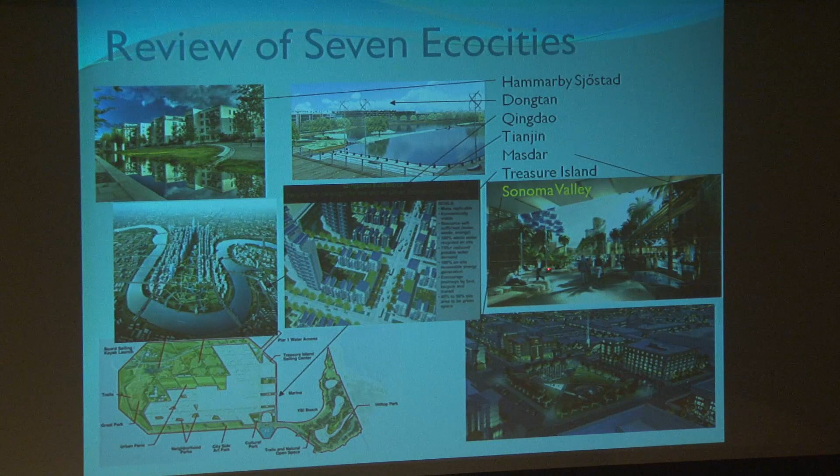So we look at some of these eco-cities—I call it a review of 7 eco-cities. This one is Hammarby Sjöstad. This is Dongtan, a virtual city. This is Tianjin, which is being built rapidly. This is Qingdao. This is Sonoma Valley—they're planning to start again after the real estate market improves. This is Treasure Island in San Francisco. And this is Masdar.

This is Sonoma Valley—yeah, okay, I made a mistake here. This is Masdar, this is Sonoma Valley. You see Masdar here—they should go out.

So if you look at the detail, Harrison Fraker divided Qingdao into eco blocks—so this is an eco block of 1,800 people. What he did was something we would not do: he thought he could do black water recycling on site in the wetland. I would never do it this way—you cannot have black water recycling in wetlands next to the apartment house.

But he has got wind turbines, solar panels everywhere, and recovery—he infiltrates all the water on the premises. So this is a complete recycle in Qingdao—except Qingdao didn't actually do it, but they did it in Tianjin. He did an energy balance, and it is self-sustainable in energy—100% renewable energy.

Not 100% recycled, though, because they do get about 50 liters from the grid, but it recycles a lot. So it is one of those concepts that may represent the future.

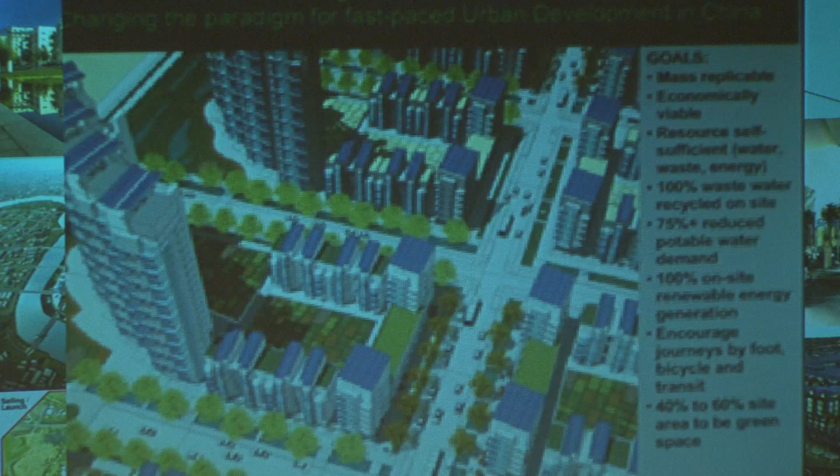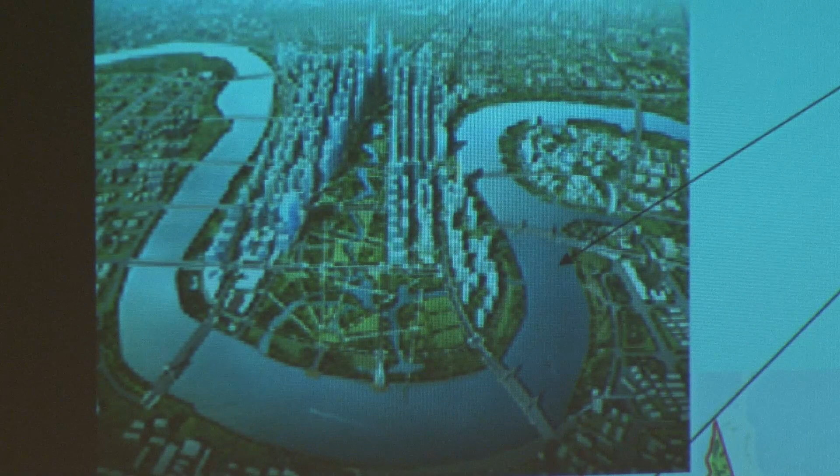This is the changing, now applied to these eco blocks here. Professor Fraker told me that they will be using the eco block concept in Tianjin, so we have to believe it. It's water-centric. They created this stream from which they reuse water. The treatment plant is somewhere in the middle, nearby, so they can use their water for reuse. They had somewhere a wastewater pond, which is not shown on the picture.

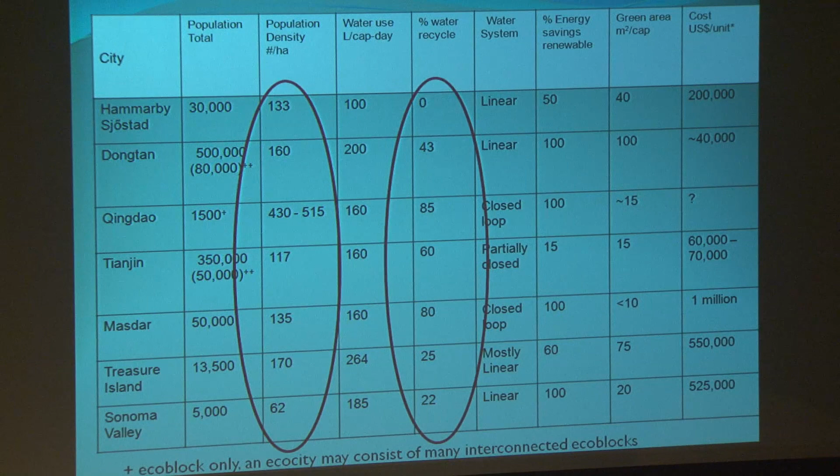Also the water recycle: Hammarby does not recycle, but they claim that with conservation they can get to 100 liters per capita per day. Masdar recycles almost everything, but they still have to bring fresh water by desalination. Qingdao would be recycling a lot. Sonoma Valley, again, 20% would do it through water conservation, and 20% will get into this one planet living criteria. Masdar, Sonoma Valley, and Qingdao would comply with one planet living criteria for eco-cities.

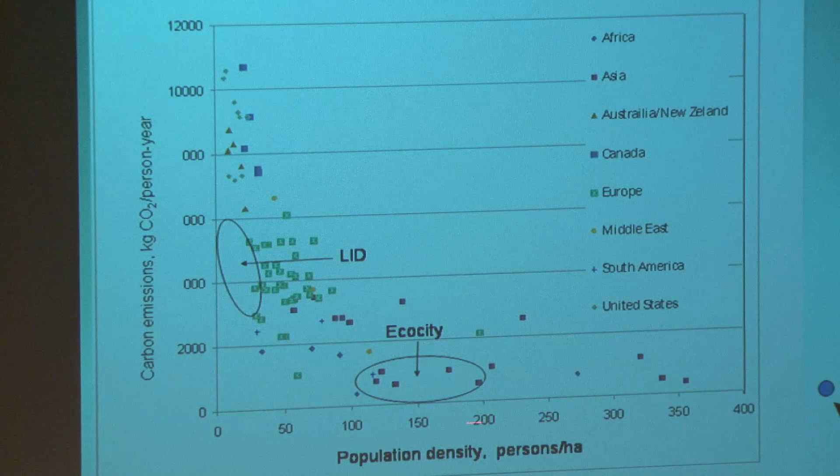Here is a reason why population density matters: here is the population density and carbon emission. These are the total carbon emissions from public transportation, heating, cooling, traffic, and water as well—water is only a small portion of it. But you can see, if you want to have completely renewable, 100% renewable, you have to be in this region. If you go beyond, it's not necessary, though you may if land is expensive. So most of these eco-cities would be in this region, 100 to 200 people per hectare.

More, this will be almost the end of it: more centralized resource recovery. So if we now want to get more from this reuse, we have to also do more in energy reuse or energy reclamation. In this case, since we have to go to anaerobic from aerobic, the influent must be more concentrated, around 1,000 milligrams per liter for COD, which would be desirable.

There might be a separation of the urine—it's not necessary, by the way. That inflow would contain sludge and other solids, shredded food and other organic solids. Other organic biodegradable solid waste may be tracked in, so you can practice something which is called co-digestion.

Because of high COD, the conventional activated sludge would not work, so you have to go to anaerobic anyway. But right now conventional activated sludge and conventional sludge digesters are not very good—they require very long residence time, and water is still diluted, so it would not work. So what Lettinga and these people are promoting is the use of an upflow anaerobic sludge blanket reactor, because in that the residence time is less than one day, so much smaller.

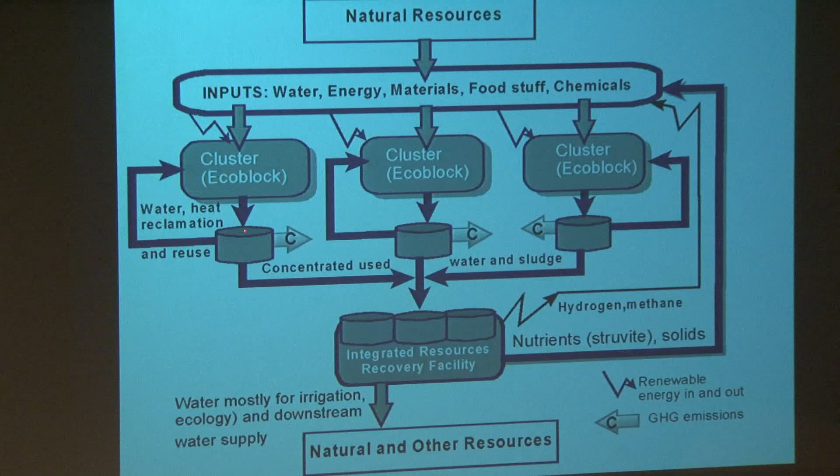So we will use these clusters, eco blocks. Let's say here we have these three clusters. They do some kind of local reuse or water reclamation, heat reclamation or reuse, and then send the really bad, concentrated stuff to this integrated resource recovery facility. The water here would be used mostly for irrigation, water supply, and downstream from the city water supply. That would not do anything to these streams which are in the city.

In this city, if we restore the streams, these streams would not have flow. But again, we can clean this to a level that these streams can actually be used for reuse, for irrigation, for toilet flushing. And you would have some kind of this double cycle system implemented in the city.

There is some energy use, but this should be producing energy—it should produce more energy than it uses. So there's recycle of energy into the grid.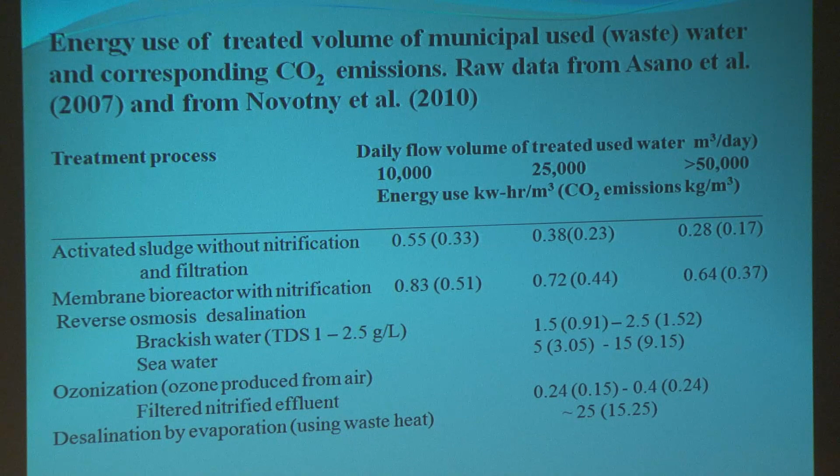Here are some numbers on how much energy is used in treatment. Activated sludge roughly uses up to 0.5 kilowatt hours per cubic meter. But you can see desalination uses up to 25 kilowatt hours per cubic meter, which would correspond to about 15 kilograms of CO2 emitted per cubic meter of desalinated water. So we have to also recover the nutrients—we are running out of phosphorus.

Some people anticipate that by 2040, net mined phosphorus will be gone. Guano and these things will not be available. There is no mining of guano in Europe, there is no phosphorus, they have to import it from North Africa. So we have to recycle phosphorus because without that, agriculture will be suffering.

Here is a more traditional concept: you have dry biomass for energy recovery. You have sewage sludge, only sludge. You can do digestion, or pyrolysis, where you get charcoal. By additional heating, you can change it to oil. You can use the oil, and you get syngas, which is carbon monoxide and hydrogen. You can combust it or produce electricity. This is more or less the traditional way to recover heat and energy from solids.

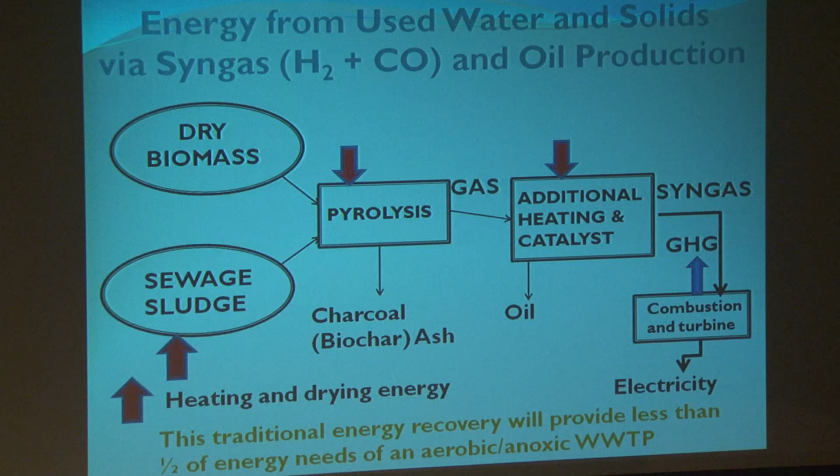This would provide maybe half of the energy needs for a treatment plant. But there's another concept, again by Verstraete.

Now you have screening, then a concentrator, as he calls it. By concentrating the waste using ultrafiltration and reverse osmosis, you get a concentrated solids flow. It goes to an anaerobic digester, produces biogas, then filter press, and you get nitrogen-rich water. That can go to pyrolysis, and you get biochar, which also contains phosphorus. This is another concept, he calls it zero waste.

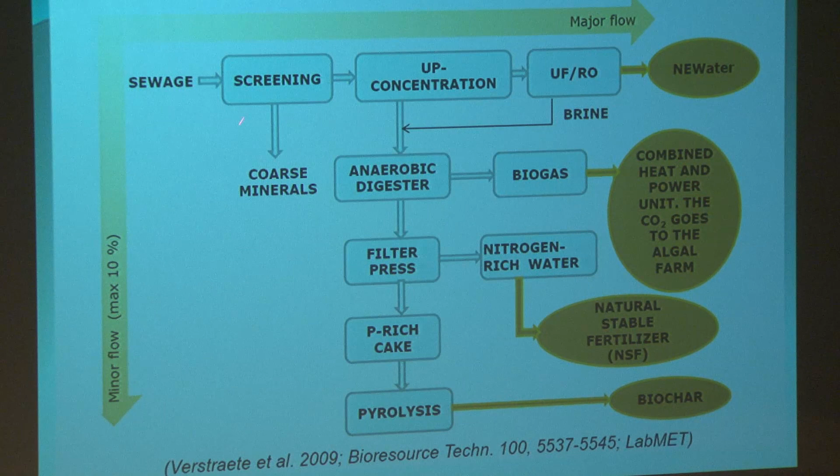In conclusion, I think looking forward there are some very interesting developments that we now see in the literature and in the laboratories. The UASB reactor has been here since 1970, so this is nothing new.

You can get 0.4 liters of methane per gram of COD removed. That has been around because you collect the biogas. By hydrogen fuel cell, which converts the biogas into electricity. First it converts the biogas into hydrogen, and electricity is produced by letting protons move through a membrane, separating them.

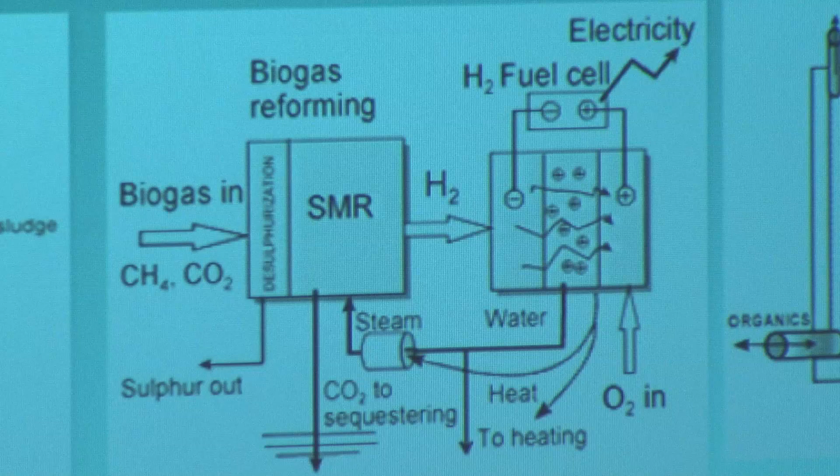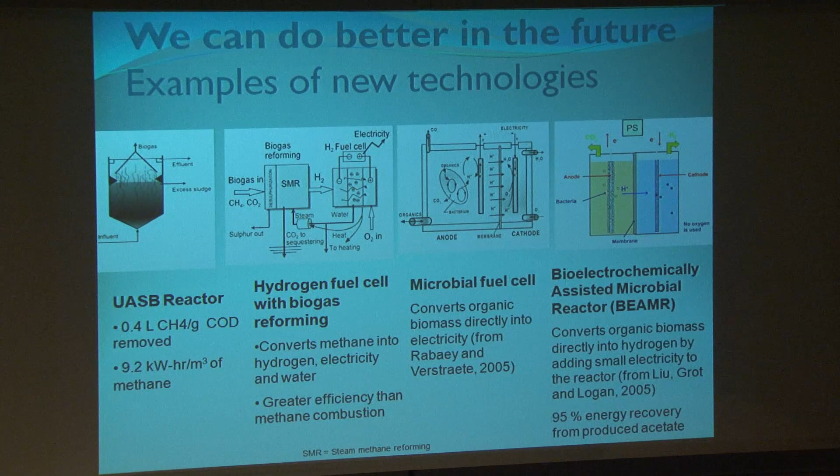Now the microbial fuel cell, the same thing can be done in a reactor. This comes from Europe, by Verstraete, but Logan at Penn State is doing the same thing. You can get electricity, not hydrogen, from this microbial fuel cell. But you can also get hydrogen, and if you add electricity, you can carry this whole process of microbial digestion to hydrogen. So we may have some kind of hydrogen- or methane-based, or electricity-based, integrated resources recovery facility.

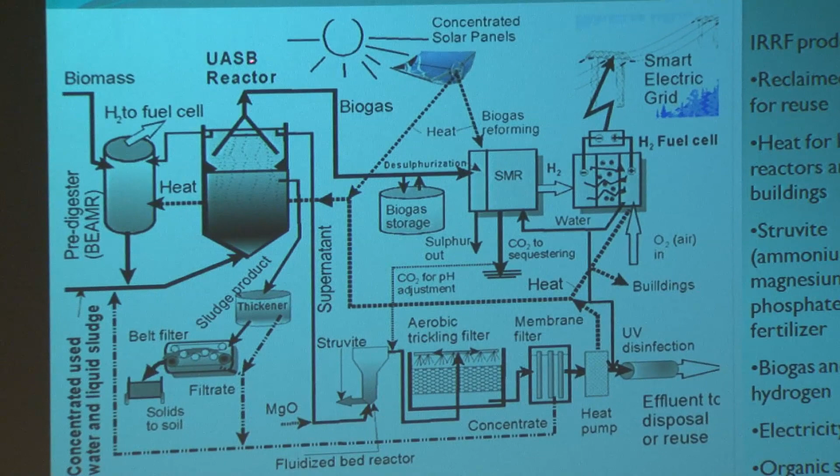So here I just plotted it for fun. Here is the upflow anaerobic sludge blanket reactor, which produces biogas. You can have a pre-digestion of the solid biomass, but a pre-digestion not to complete methane production, but to hydrogen production, which can actually be helped by this bioelectrochemically assisted microbial reactor.

Bioelectrochemically assisted microbial reactor: if you add a little bit of electricity, the acetates will go to hydrogen, not methane. At this point you don't have to do that because you want to shorten the detention time. That hydrogen will go to the hydrogen fuel cell.

Now, biogas can go to steam reforming, and it can go to hydrogen too. Again, this produces CO2, which can be used. Now let me go to this side.

The effluent from that will go after, with magnesium, we can produce struvite, an ammonium magnesium phosphate, which is a very good fertilizer. You can get the fertilizer out, but that's done at high pH, so you need CO2 to neutralize the pH, which is producing alkalinity. After some aerobic trickling filtration and membrane filtration, you can get water that can be used and reused. This also produces heat, so you can have all the heating you need, with excess heat, and electric energy coming out of that. This is really wild.

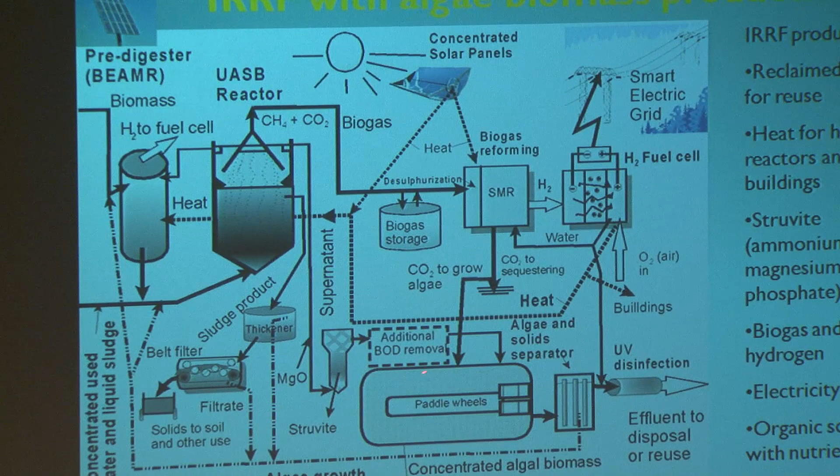You can use that CO2. Here is a kind of algae reactor, concentrating, which will produce algal biomass. I think this is being done at MIT. Because that CO2 which is produced here can help produce algal biomass, this algal biomass, after you separate the water, can go back to these reactors and even produce more energy.

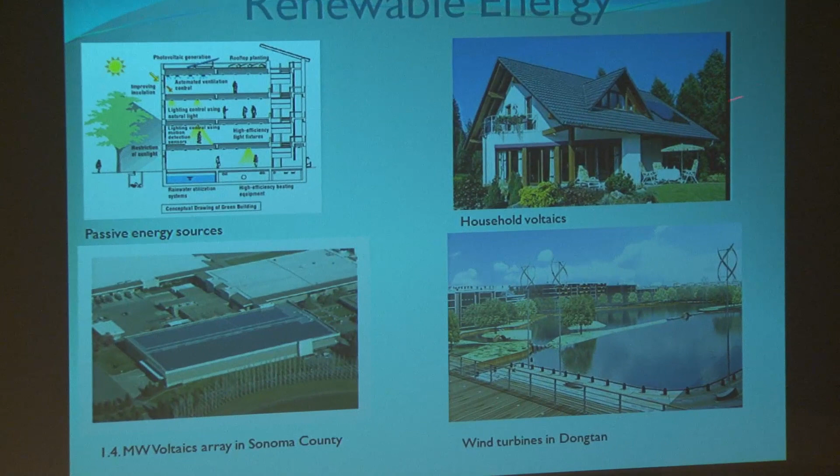This will be one of three stations providing enough electricity so that all electricity can be renewable. This is on the individual house - this is how you do it in green buildings, all the stuff you can do: photovoltaics, passive heating, passive cooling, etc.

Here is the Dongtan idea for having wind turbines all over the city. The city of Dongtan was supposed to have 500,000 people. It's kind of put on hold and might be developed. The reason I'm featuring it is because these first concepts of eco-cities were implemented, mostly, in Dongtan.

So one more slide, maybe we can go to conclusion. Water conservation is the best alternative solution to water availability, and there is a relationship between water use and energy reductions. Combined sewers will become obsolete - no CSOs or SSOs, combined sewer overflows or sanitary sewer overflows.

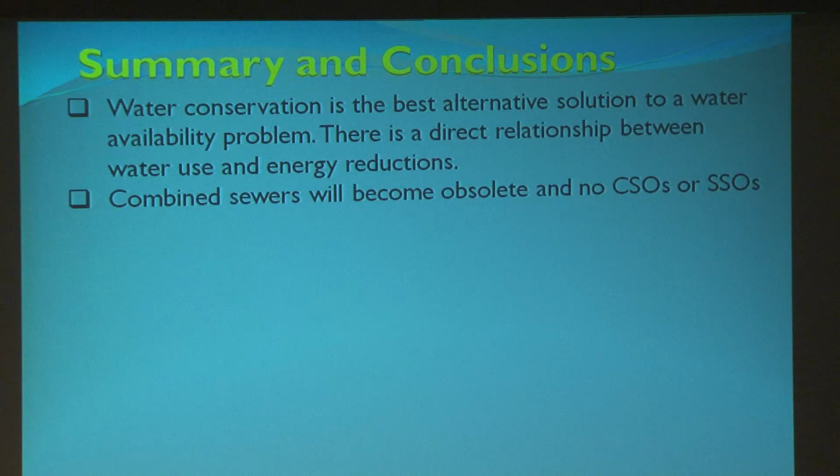Excess capacity of existing sanitary sewers can be leased to cable companies, which is being done in Tokyo. They're making a lot of money.

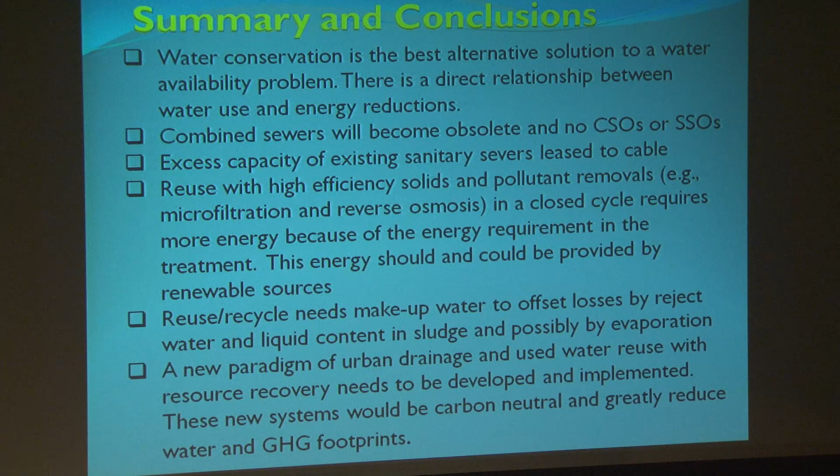Reuse with high efficiency solids and pollutant removal in a closed system requires more energy because of the treatment energy requirement. This energy should and could be provided by renewable sources. Reuse and recycling needs makeup water - you cannot do complete recycling, to offset losses by reject water and liquid content in sludge, and possibly by evaporation. A new paradigm of urban drainage and used water with resource recovery needs to be developed and implemented. These new systems would be carbon neutral and greatly reduce water and GHG emissions.

Energy from separated and concentrated used water can be extracted by anaerobic processes in the form of methane, and in cities of the future as electricity or hydrogen, and by heat pumps as heat. Higher COD concentration and reducing used water volumes of separated black water is key for efficient anaerobic energy separation. Co-digestion of concentrated used black water, sludge, and other organic solids is possible and should be considered.

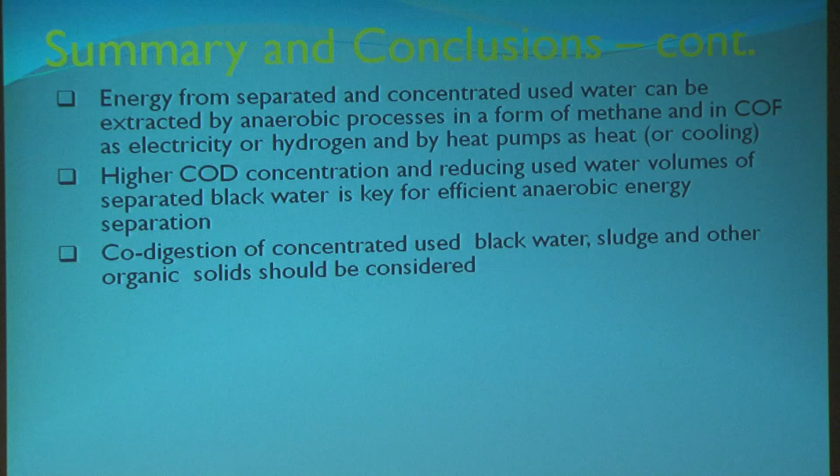Nutrients must be recovered. A hybrid system with an integrated resource recovery facility will dramatically reduce water use, could achieve zero pollution, produce energy, heat, fertilizer, solids, and even produce biomass and sequester carbon. Switching from methane and syngas energy recovery to hydrogen and direct energy is on the horizon. Energy and resource recovery could bring about significant economic benefits compared to current costs of wastewater disposal and damage to the environment.

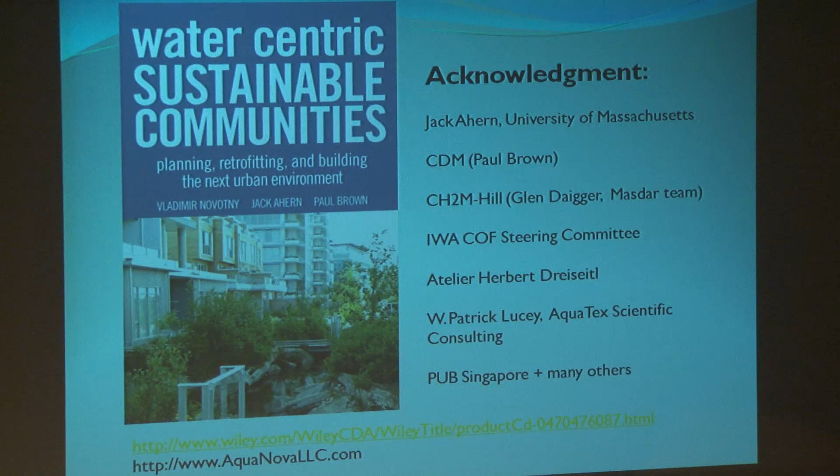And here is a little bit of plugging of the book, but mainly for acknowledgement - I worked with some good people. Jack Ahern, vice provost now of University of Massachusetts, he's a landscape architect. Paul Brown, executive vice president of CDM. I got a lot of knowledge and pictures from Herbert Dreiseitl, the best landscape architect of waterscapes. If you're interested in this topic, Herbert Dreiseitl is right here at Harvard now, on a scholarship, but he's got offices in Singapore, China, Germany, and Switzerland.

CH2M Hill - Glen Daigger is the pioneer of that again. Patrick Lucey from AquaTex in Victoria. Public Utility Board Singapore, and many others. So it's an exciting development - hopefully an upcoming development.

It may be 20 years, but it's already happening - the number of one-planet-living cities is growing. There will be one in Brazil, Turkey, Portugal, maybe in Europe. They're thinking of one in the US, but I'm not going to reveal where because it could collapse any day. Sonoma County will be a one-planet-living community, maybe Portland is leaning towards that, and Victoria. So it's exciting - it's a new change, hopefully we can call it a new paradigm.